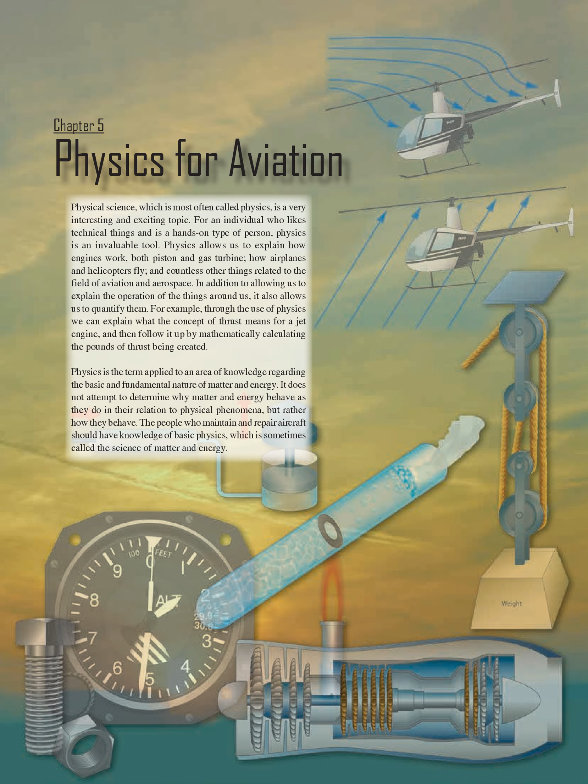The people who maintain and repair aircraft should have knowledge of basic physics, which is sometimes called the science of matter and energy. Matter is the foundation, or the building blocks, for any discussion of physics. According to the dictionary, matter is what all things are made of, whatever occupies space, has mass, and is perceptible to the senses in some way.

According to the law of conservation, matter cannot be created or destroyed, although it is possible to change its physical state. When liquid gasoline vaporizes and mixes with air, and then burns, it might seem that this piece of matter has disappeared and no longer exists. Although it no longer exists in the state of liquid gasoline, the matter still exists in the form of the gases given off by the burning fuel.

Characteristics of matter: mass and weight. Mass is a measure of the quantity of matter in an object. In other words, how many molecules are in the object, how many atoms are in the object, or to be more specific, how many protons, neutrons, and electrons are in the object. The mass of an object does not change regardless of where you take it in the universe, or with a change of state. The only way to change the mass of an object is to add or take away atoms.

Mathematically, mass can be stated as follows: mass equals weight divided by acceleration due to gravity. The acceleration due to gravity here on Earth is 32.2 feet per second per second, 32.2 fps/s. An object weighing 32.2 pounds here on Earth is said to have a mass of 1 slug. A slug is a quantity of mass that will accelerate at a rate of 1 ft/s² when a force of 1 pound is applied. In other words, under standard atmospheric conditions, where gravity is equal to 32.2 fps/s, a mass of 1 slug would be equal to 32.2 pounds.

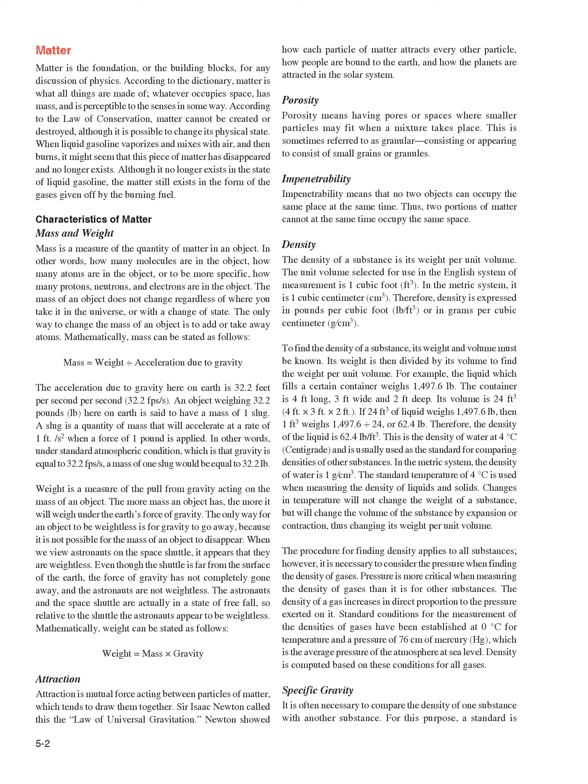Specific gravity. It is often necessary to compare the density of one substance with another substance. For this purpose, a standard is needed. Water is the standard that physicists have chosen to use when comparing the densities of all liquids and solids. For gases, air is most commonly used, but hydrogen is also sometimes used as a standard for gases.

In physics, the word specific implies a ratio. Thus, specific gravity is calculated by comparing the weight of a definite volume of the given substance with the weight of an equal volume of water. The terms specific weight or specific density are sometimes used to express this ratio.

The following formulas are used to find the specific gravity of liquids and solids. Specific gravity equals weight of the substance over weight of an equal volume of water, or specific gravity equals density of the substance over density of water. The same formulas are used to find the density of gases by substituting air or hydrogen for water. Specific gravity is not expressed in units, but as pure numbers.

For example, if a certain hydraulic fluid has a specific gravity of 0.8, 1 ft3 of the liquid weighs 0.8 times as much as 1 ft3 of water, 62.4 times 0.8, or 49.92 pounds. Specific gravity and density are independent of the size of the sample under consideration and depend only upon the substance of which it is made. See Figure 5-1 for typical values of specific gravity for various substances.

A device called a hydrometer is used for measuring specific gravity of liquids. This device consists of a tubular glass float contained in a larger glass tube, Figure 5-2. The larger glass tube provides the container for the liquid. A rubber suction bulb draws the liquid up into the container. There must be enough liquid raising the float to prevent it from touching the bottom. The float is weighted and has a vertically graduated scale.

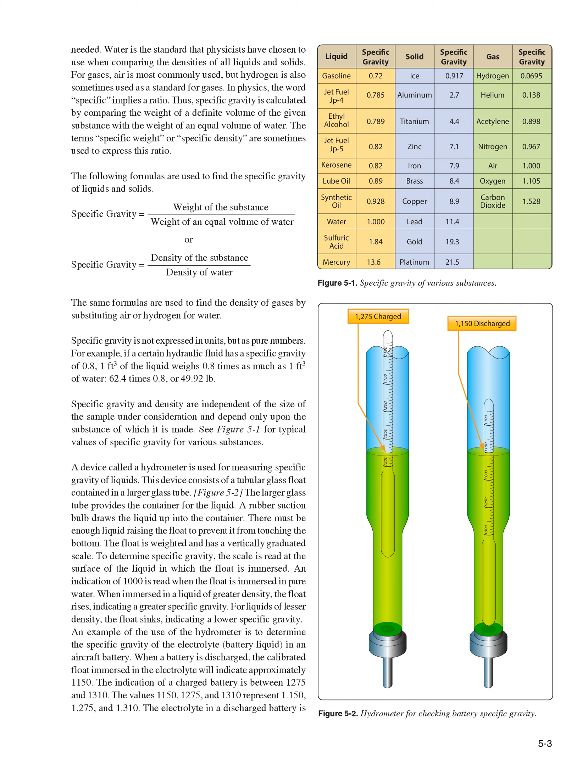The values 1150, 1275, and 1310 represent 1.150, 1.275, and 1.310. The electrolyte in a discharged battery is 1.15 times denser than water, and in a charged battery 1.275 to 1.31 times denser than water.

Energy is typically defined as something that gives us the capacity to perform work. As individuals, saying that we feel full of energy is an indicator that we can perform a lot of work. Energy can be classified as one of two types, either as potential energy or kinetic energy.

Potential energy is defined as being energy at rest, or energy that is stored. Potential energy may be classified into three groups: energy due to position, energy due to distortion of an elastic body, and energy which produces work through chemical action.

Examples of the first group are water in an elevated reservoir or an airplane raised off the ground with jacks. A stretched bungee cord on a Piper Tri-Pacer or a compressed spring are examples of the second group, and energy in aviation gasoline, food, or storage batteries are examples of the third group.

To calculate the potential energy of an object due to its position, as in height, the following formula is used: potential energy equals weight times height. A calculation based on this formula will produce an answer that has units of foot-pounds or inch-pounds, which are the same units that apply to work.

Work, which is covered later in this chapter, is described as a force being applied over a measured distance, with the force being pounds and the distance being feet or inches. Potential energy and work have a lot in common.

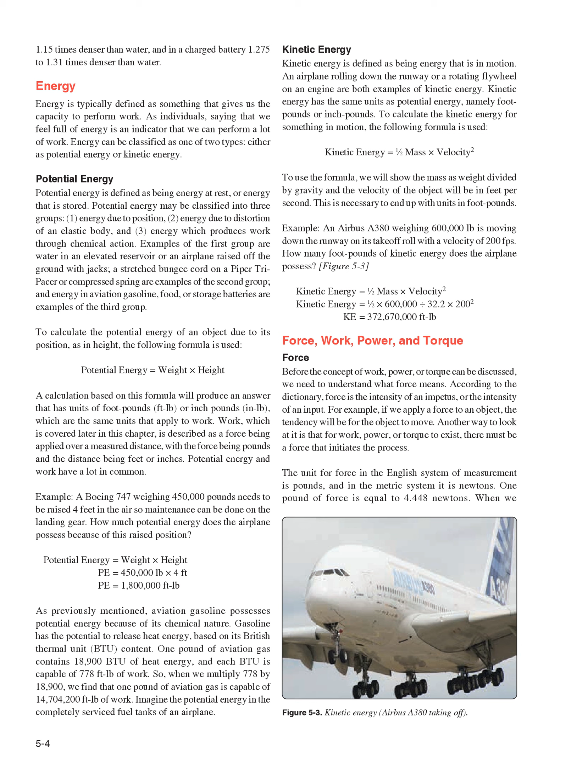When we calculate the thrust of a turbine engine, we use the formula force equals mass times acceleration, and the thrust of the engine is expressed in pounds. The GE90-115 turbofan engine, power plant for the Boeing 777-300, for example, has 115,000 pounds of thrust.

Work: the study of machines, both simple and complex, can be seen as a study of the energy of mechanical work. This is true because all machines transfer input energy, or the work done on the machine, to output energy, or the work done by the machine. Work, in the mechanical sense of the term, is done when a resistance is overcome by force acting through a measurable distance. Two factors are involved: force, and movement through a distance.

As an example, suppose a small aircraft is stuck in the snow. Two men push against it for a period of time, but the aircraft does not move. According to the technical definition, no work had been done when the men were pushing against the aircraft.

By definition, work is accomplished only when an object is displaced some distance against a resistive force. To calculate work, the following formula is used: work equals force, F, times distance, D.

In the English system, the force will be identified in pounds and the distance either in feet or inches, so the units will be foot-pounds or inch-pounds. Notice these are the same units that were used for potential and kinetic energy.

In the metric system, the force is identified in newtons, N, and the distance in meters, with the resultant units being joules. 1 pound of force is equal to 4.448 N and 1 meter is equal to 3.28 feet. 1 joule is equal to 1.36 foot-pounds.

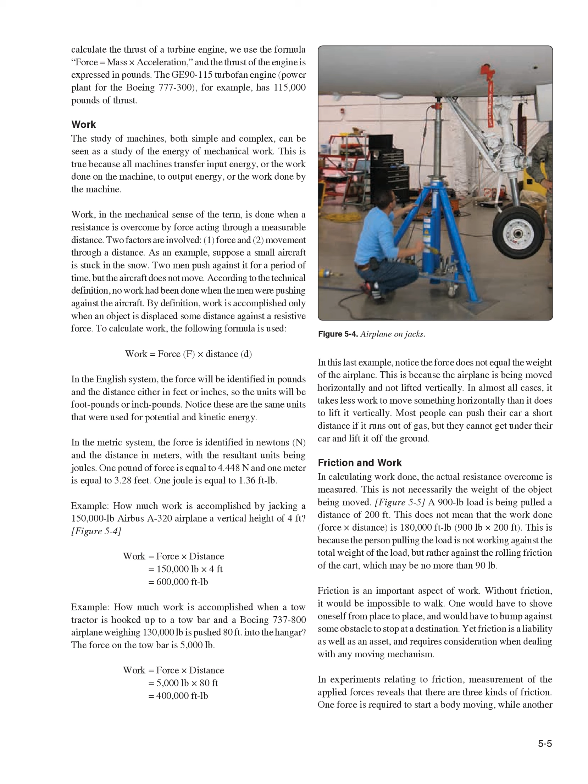In experiments relating to friction, measurement of the applied forces reveals that there are three kinds of friction. One force is required to start a body moving, while another is required to keep the body moving at constant speed. Also, after a body is in motion, a definitely larger force is required to keep it sliding than to keep it rolling. Thus, the three kinds of friction may be classified as: 1. Starting or static friction, 2. Sliding friction, and 3. Rolling friction.

Static friction. When an attempt is made to slide a heavy object along a surface, the object must first be broken loose or started. Once in motion, it slides more easily. The breaking loose force is, of course, proportional to the weight of the body. The force necessary to start the body moving slowly is designated F, and F is the normal force pressing the body against the surface, which is usually its weight.

Since the nature of the surfaces rubbing against each other is important, they must be considered. The nature of the surfaces is indicated by the coefficient of starting friction, which is designated by the letter K. This coefficient can be established for various materials and is often published in tabular form. Thus, when the load, weight of the object, is known, starting friction can be calculated by using the following formula.

F equals Kf. For example, if the coefficient of sliding friction of a smooth iron block on a smooth, horizontal surface is 0.3, the force required to start a 10 pound block would be 3 pounds, a 40-pound block, 12 pounds. Starting friction for objects equipped with wheels and roller bearings is much smaller than that for sliding objects.

For example, a locomotive would have difficulty getting a long train of cars in motion all at one time. Therefore, the couplers between the cars are purposely made to have a few inches of play. When starting the train, the engineer backs the engine until all the cars are pushed together. Then, with a quick start forward, the first car is set in motion.

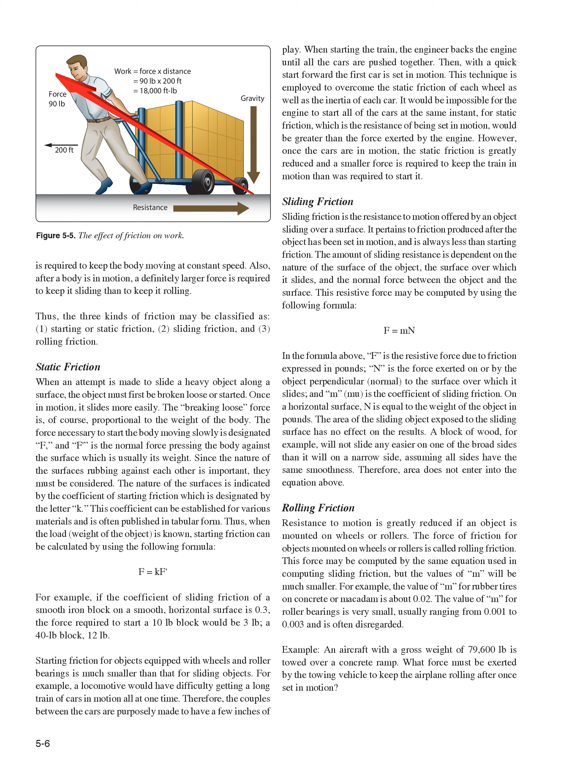Example: an aircraft with a gross weight of 79,600 pounds is towed over a concrete ramp. What force must be exerted by the towing vehicle to keep the airplane rolling after once set in motion? F equals mu N equals 0.02 times 79,600 pounds equals 1,592 pounds.

The concept of power involves the previously discussed topic of work, which was a force being applied over a measured distance, but adds one more consideration: time. In other words, how long it takes to accomplish the work. If someone asked the average person if he or she could lift 1 million pounds 5 feet off the ground, the answer most assuredly would be no.

This person would probably assume that he or she is to lift it all at once. What if he or she is given 365 days to lift it, and could lift small amounts of weight at a time? The work involved would be the same, regardless of how long it took to lift the weight, but the power required is different. If the weight is to be lifted in a shorter period of time, it will take more power.

The formula for power is as follows: power equals force times distance divided by time. The units for power will be foot-pounds per minute, foot-pounds per second, inch-pounds per minute or second, and possibly mile-pounds per hour. The units depend on how distance and time are measured.

Many years ago, there was a desire to compare the power of the newly evolving steam engine to that of horses. People wanted to know how many horses the steam engine was equivalent to. The value we know currently as 1 horsepower, HP, was developed, and it is equal to 550 foot-pounds per second. Because of this, it was found that the average horse could lift a weight of 550 pounds, 1 foot off the ground, in 1 second.

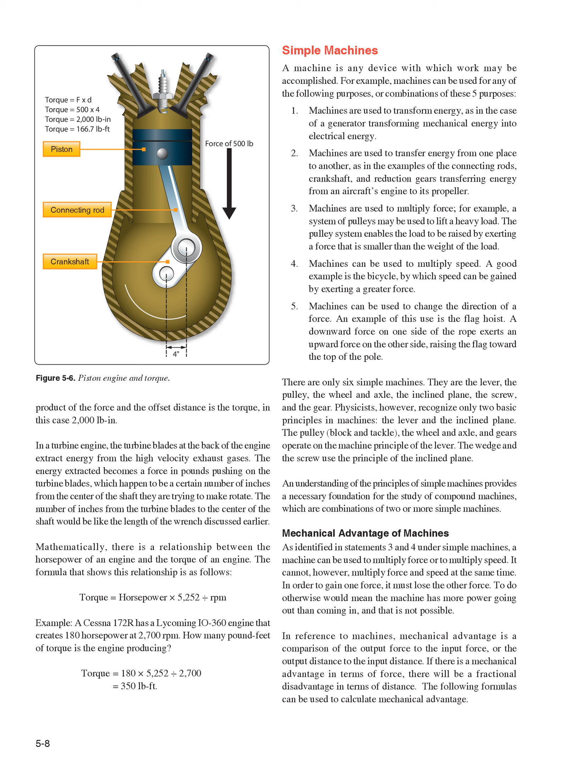In reference to machines, mechanical advantage is a comparison of the output force to the input force, or the output distance to the input distance. If there is a mechanical advantage in terms of force, there will be a fractional disadvantage in terms of distance. The following formulas can be used to calculate mechanical advantage. Mechanical advantage equals force out divided by force in, or mechanical advantage equals distance out divided by distance in.

The lever. The simplest machine, and perhaps the most familiar one, is the lever. A seesaw is a familiar example of a lever, with 2 people sitting on either end of a board and a pivoting point in the middle. There are 3 basic parts in all levers. They are the fulcrum F, a force or effort E, and a resistance R.

Shown in figure 5-7 are the pivot point F, fulcrum, the effort E which is applied at a distance L from the fulcrum, and a resistance R which acts at a distance L from the fulcrum. Distances L and L are the lever arms.

The concept of torque was discussed earlier in this chapter, and torque is very much involved in the operation of a lever. When a person sits on one end of a seesaw, that person applies a downward force in pounds which acts along the distance to the center of the seesaw. This combination of force and distance creates torque, which tries to cause rotation.

First-class lever. In the first-class lever, the fulcrum is located between the effort and the resistance. As mentioned earlier, the seesaw is a good example of a lever, and it happens to be a first-class lever. The amount of weight and the distance from the fulcrum can be varied to suit the need. Increasing the distance from the applied effort to the fulcrum, compared to the distance from the fulcrum to the weight being moved, increases the advantage provided by the lever.

Crowbars, shears, and pliers are common examples of this class of lever. The proper balance of an airplane is also a good example, with the center of lift on the wing being the pivot point, or fulcrum, and the weight fore and aft of this point being the effort and the resistance.

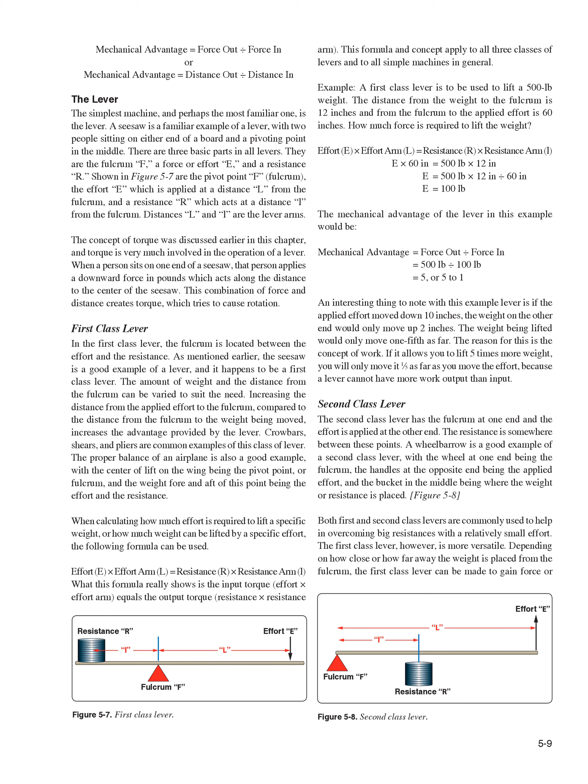Both first and second-class levers are commonly used to help in overcoming big resistances with a relatively small effort. The first-class lever, however, is more versatile. Depending on how close or how far away the weight is placed from the fulcrum, the first-class lever can be made to gain force or gain distance, but not both at the same time. The second-class lever can only be made to gain force.

Example: the distance from the center of the wheel to the handles on a wheelbarrow is 60 inches. The weight in the bucket is 18 inches from the center of the wheel. If 300 pounds is placed in the bucket, how much force must be applied at the handles to lift the wheelbarrow? Effort (E) times effort arm (L) equals resistance (R) times resistance arm (L). E × 60 inches = 300 pounds × 18, so E = 300 pounds × 18 ÷ 60, and E = 90 pounds.

The mechanical advantage of the lever in this example would be: mechanical advantage equals force out divided by force in, equals 300 pounds divided by 90 pounds, equals 3.33, or 3.33 to 1.

Third-class lever. There are occasions when it is desirable to speed up the movement of the resistance even though a large amount of effort must be used. Levers that help accomplish this are third-class levers. As shown in Figure 5.9, the fulcrum is at one end of the lever and the weight or resistance to be overcome is at the other end, with the effort applied at some point between. Third-class levers are easily recognized because the effort is applied between the fulcrum and the resistance.

The retractable main landing gear on an airplane is a good example of a third-class lever. The top of the landing gear, where it attaches to the airplane, is the pivot point. The wheel and brake assembly at the bottom of the landing gear is the resistance. The hydraulic actuator that makes the gear retract is attached somewhere in the middle, and that is the applied effort.

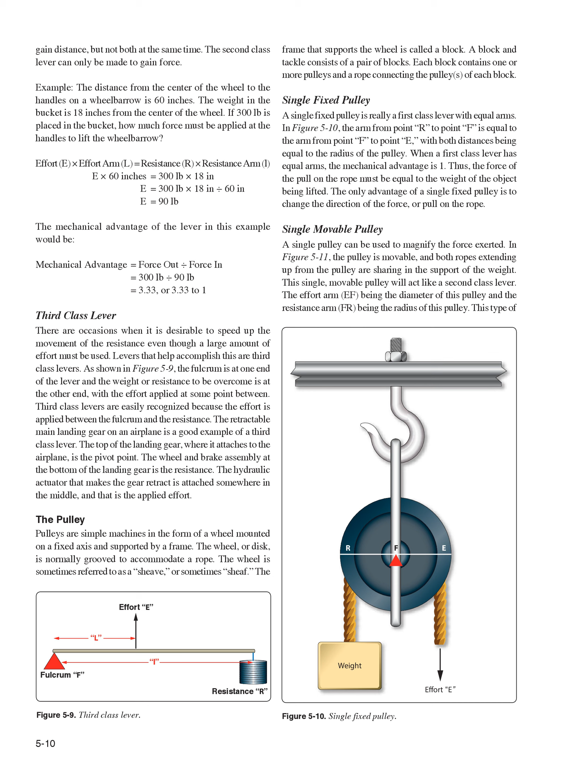This type of pulley would have a mechanical advantage of 2 because the diameter of the pulley is double the radius of the pulley. In use, if someone pulled in 4 feet of the effort rope, the weight would only rise off the floor 2 feet. If the weight was 100 pounds, the effort applied would only need to be 50 pounds.

With this type of pulley, the effort will always be 1/2 of the weight being lifted.

Block and tackle. A block and tackle is made up of multiple pulleys, some of them fixed and some movable. In Figure 5.12, the block and tackle is made up of 4 pulleys, the top 2 being fixed and the bottom 2 being movable. Viewing the figure from right to left, notice there are 4 ropes supporting the weight and a 5th rope where the effort is applied. The number of weight supporting ropes determines the mechanical advantage of a block and tackle, so in this case the mechanical advantage is 4. If the weight was 200 pounds, it would require a 50 pound effort to lift it.

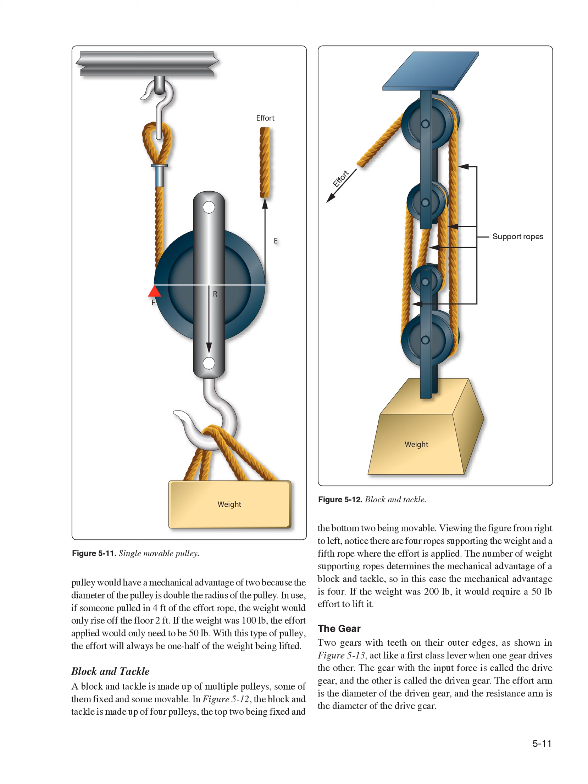This analysis tells us that when a large gear drives a small one, the small one turns faster and has less available force. In order to be a force-gaining machine, the small gear needs to turn the large one. When the terminology reduction gearbox is used, such as a propeller reduction gearbox, it means that there is more RPM going in than is coming out. The end result is an increase in force and ultimately torque.

Bevel gears are used to change the plane of rotation, so that a shaft turning horizontally can make a vertical shaft rotate. The size of the gears and their number of teeth determine the mechanical advantage, and whether force is being increased or RPM is being increased. If each gear has the same number of teeth, there would be no change in force or RPM.

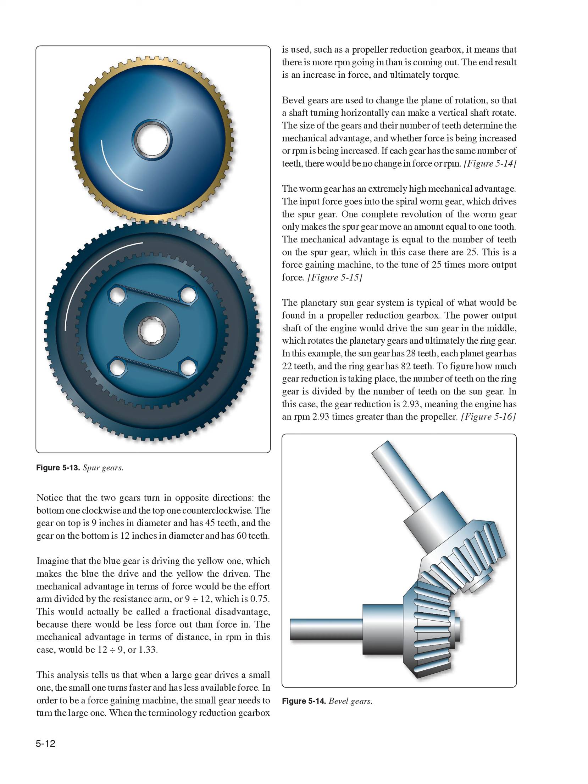Figure 5.16. Inclined plane. The inclined plane is a simple machine that facilitates the raising or lowering of heavy objects by application of a small force over a relatively long distance. Some familiar examples of the inclined plane are mountain highways, and a loading ramp on the back of a moving truck. When weighing a small airplane, like a Cessna 172, an inclined plane, or ramp, can be used to get the airplane on the scales by pushing it, rather than jacking it.

To calculate the force needed to push the airplane up the ramps, use the same formula introduced earlier when levers were discussed, as follows: Effort (E) times effort arm (L) equals resistance (R) times resistance arm (l). E × 24 in = 1,600 lb × 6 in. E = 1,600 lb × 6 in ÷ 24 in. E = 400 pounds.

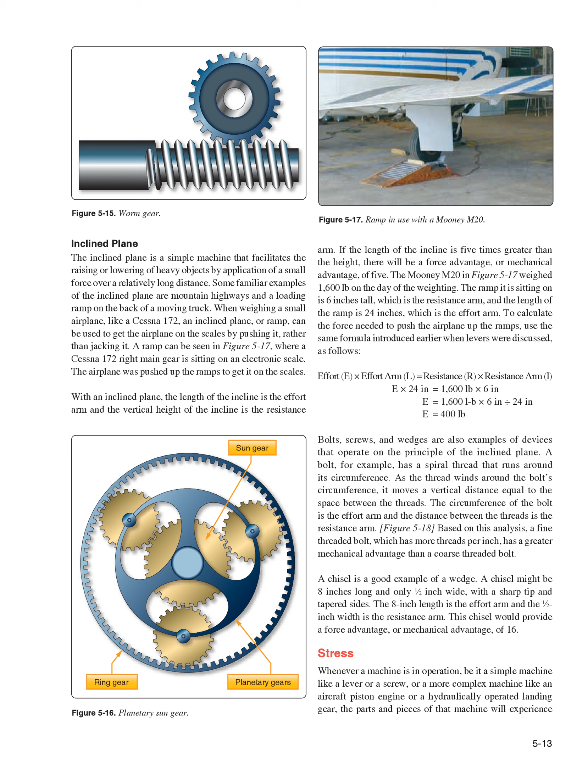Stress. Whenever a machine is in operation, be it a simple machine like a lever or a screw, or a more complex machine like an aircraft piston engine or a hydraulically operated landing gear, the parts and pieces of that machine will experience something called stress. Whenever an external force is applied to an object, like a weight pushing on the end of a lever, a reaction will occur inside the object which is known as stress. Stress is typically measured in pounds per square foot or pounds per square inch (psi).

External force acting on an object causes the stress to manifest itself in one of 5 forms, or a combination of those 5. The 5 forms are tension, compression, torsion, bending, and shear. Tension is a force that tries to pull an object apart.

In the block and tackle system discussed earlier in this chapter, the upper block that housed the 2 fixed pulleys was secured to an overhead beam. The movable lower block and its 2 pulleys were hanging by ropes, and the weight was hanging below the entire assembly. The weight being lifted would cause the ropes and the blocks to be under tension. The weight is literally trying to pull the rope apart, and ultimately would cause the rope to break if the weight was too great. Compression is a force that tries to crush an object.

An excellent example of compression is when a sheet metal airplane is assembled using the fastener known as a rivet. The rivet passes through a hole drilled in the pieces of aluminum, and then a rivet gun on one side and a bucking bar on the other apply a force. This applied force tries to crush the rivet and makes it expand to fill the hole and securely hold the aluminum pieces together.

Figure 5.19. Torsion is the stress an object experiences when it is twisted, which is what happens when torque is applied to a shaft. Torsion is made up of 2 other stresses, tension and compression. When a shaft is twisted, tension is experienced at a diagonal to the shaft and compression acts 90 degrees to the tension.

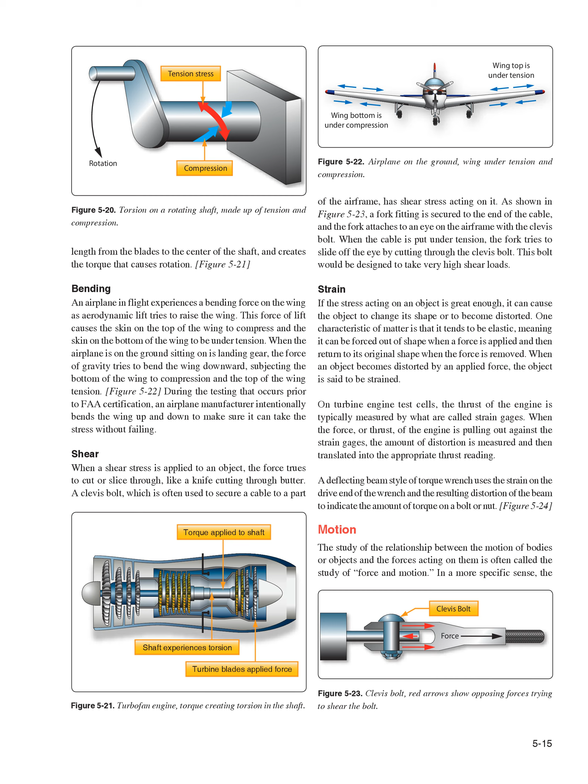Figure 5.24. Motion. The study of the relationship between the motion of bodies or objects and the forces acting on them is often called the study of force and motion. In a more specific sense, the relationship between velocity, acceleration, and distance is known as kinematics.

Uniform motion. Motion may be defined as a continuing change of position or place, or as the process in which a body undergoes displacement. When an object is at different points in space at different times, that object is said to be in motion, and if the distance the object moves remains the same for a given period of time, the motion may be described as uniform. Thus, an object in uniform motion always has a constant speed.

Speed and velocity. In everyday conversation, speed and velocity are often used as if they mean the same thing. In physics, they have definite and distinct meanings. Speed refers to how fast an object is moving, or how far the object will travel in a specific time. The speed of an object tells nothing about the direction an object is moving.

For example, if the information is supplied that an airplane leaves New York City and travels 8 hours at a speed of 150 miles per hour, this information tells nothing about the direction in which the airplane is moving. At the end of 8 hours, it might be in Kansas City, or if it traveled in a circular route, it could be back in New York City.

Velocity is that quantity in physics which denotes both the speed of an object and the direction in which the object moves. Velocity can be defined as the rate of motion in a particular direction. Velocity is also described as being a vector quantity, a vector being a line of specific length, having an arrow on one end or the other. The length of the line indicates the number value and the arrow indicates the direction in which that number is acting.

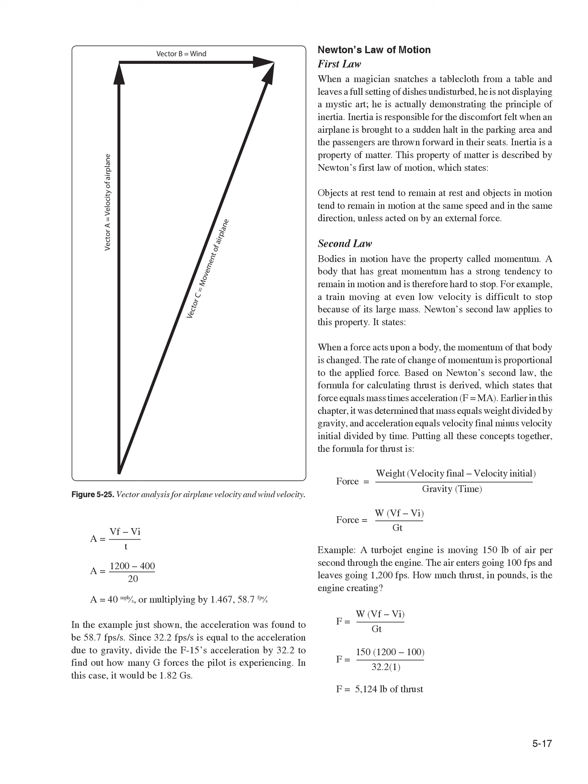Third law: Newton's third law of motion is often called the law of action and reaction. It states that for every action there is an equal and opposite reaction. This means that if a force is applied to an object, the object will supply a resistive force exactly equal to and in the opposite direction of the force applied.

It is easy to see how this might apply to objects at rest. In application, as a man stands on the floor, the floor exerts a force against his feet exactly equal to his weight. This law is also applicable when a force is applied to an object in motion. Forces always occur in pairs. The term acting force means the force one body exerts on a second body, and reacting force means the force the second body exerts on the first.

When an aircraft propeller pushes a stream of air backward with a force of 500 pounds, the air pushes the blades forward with a force of 500 pounds. This forward force causes the aircraft to move forward.

A turbofan engine exerts a force on the air entering the inlet duct, causing it to accelerate out the fan duct and the tailpipe. The air accelerating to the rear is the action, and the force inside the engine that makes it happen is the reaction, also called thrust.

Circular motion is the motion of an object along a curved path that has a constant radius. For example, if one end of a string is tied to an object and the other end is held in the hand, the object can be swung in a circle. The object is constantly deflected from a straight, linear path by the pull exerted on the string, as shown in figure 5-26.

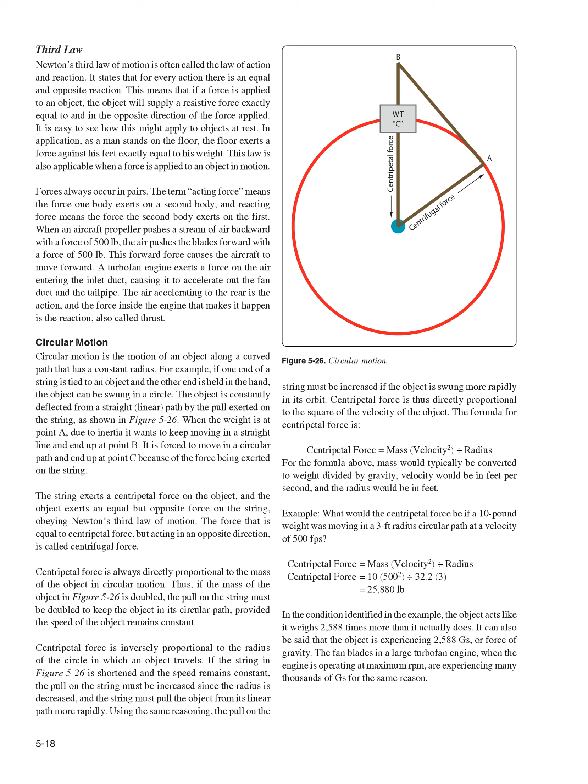In the condition identified in the example, the object acts like it weighs 2,588 times more than it actually does. It can also be said that the object is experiencing 2,588 Gs, or force of gravity. The fan blades in a large turbofan engine, when the engine is operating at maximum RPM, are experiencing many thousands of Gs for the same reason.

Heat is a form of energy. It is produced only by the conversion of one of the other forms of energy. Heat may also be defined as the total kinetic energy of the molecules of any substance. Some forms of energy which can be converted into heat energy are as follows.

Mechanical energy: this includes all methods of producing increased motion of molecules such as friction, impact of bodies, or compression of gases. Electrical energy is converted to heat energy when an electric current flows through any form of resistance such as an electric iron, electric light, or an electric blanket.

Chemical energy: most forms of chemical reaction convert stored potential energy into heat. Some examples are the explosive effects of gunpowder, the burning of oil or wood, and the combining of oxygen and grease. Radiant energy: electromagnetic waves of certain frequencies produce heat when they are absorbed by the bodies they strike,

such as X-rays, light rays, and infrared rays. Nuclear energy: energy stored in the nucleus of atoms is released during the process of nuclear fission in a nuclear reactor or atomic explosion. Sun: all heat energy can be directly or indirectly traced to the nuclear reactions occurring in the sun.

When a gas is compressed, work is done and the gas becomes warm or hot. Conversely, when a gas under high pressure is allowed to expand, the expanding gas becomes cool. In the first case, work was converted into energy in the form of heat. In the second case, heat energy was expended. Since heat is given off or absorbed, there must be a relationship between heat energy and work. Also, when two surfaces are rubbed together, the friction develops heat.

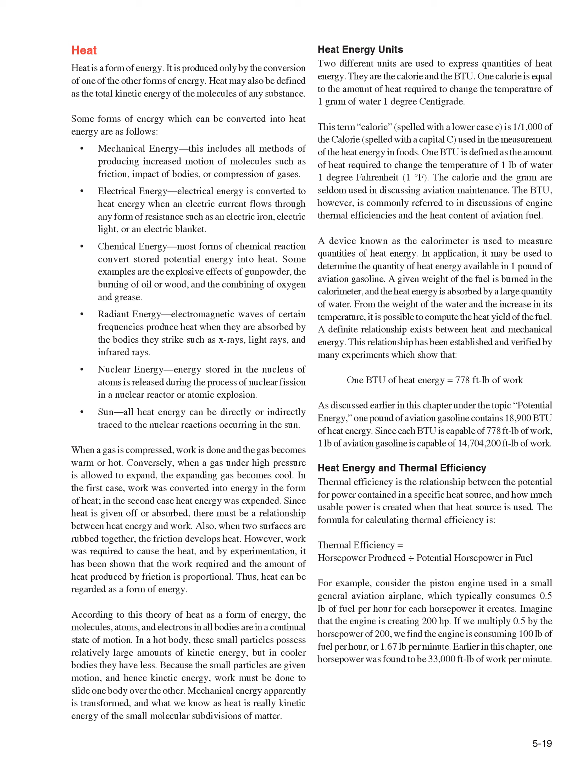Earlier in this chapter, 1 horsepower was found to be 33,000 feet-pounds of work per minute. The potential horsepower in the fuel burned for this example engine would be: 1.67 pounds per minute times 18,900 BTUs per pound, times 778 feet-pounds per BTU, divided by 33,000 feet-pounds per minute. HP equals 744. The example engine is burning enough fuel that it has the potential to create 744 horsepower, but it is only creating 200.

The thermal efficiency of the engine would be: thermal efficiency equals HP produced divided by HP in fuel, equals 200 divided by 744, equals 0.2688, or 26.88%. More than 70% of the energy in the fuel is not being used to create usable horsepower. The wasted energy is in the form of friction and heat. A tremendous amount of heat is given up to the atmosphere and not used inside the engine to create power.

Heat transfer. There are three methods by which heat is transferred from one location to another, or from one substance to another: conduction, convection, and radiation. Conduction heat transfer always takes place by areas of high heat energy migrating to areas of low heat energy. Heat transfer by conduction requires that there be physical contact between an object that has a large amount of heat energy and one that has a smaller amount.

Everyone knows from experience that the metal handle of a heated pan can burn the hand. A plastic or wood handle, however, remains relatively cool even though it is in direct contact with the pan.

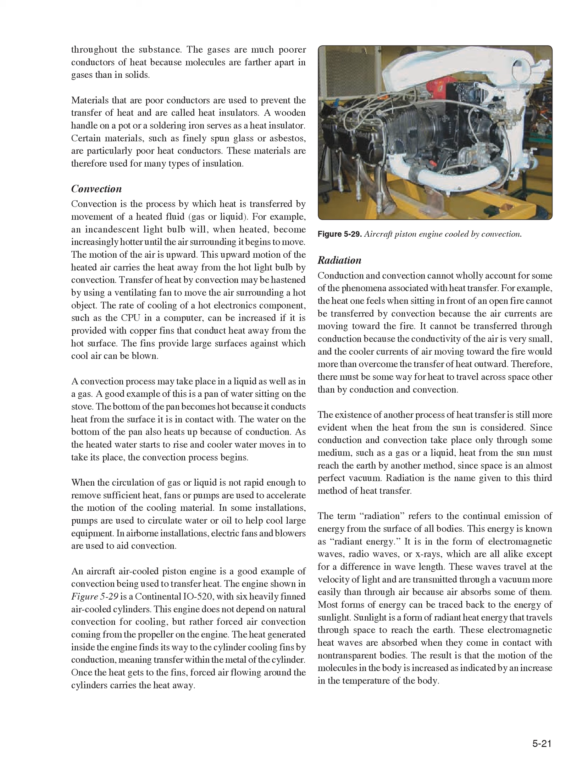These electromagnetic heat waves are absorbed when they come in contact with non-transparent bodies. The result is that the motion of the molecules in the body is increased as indicated by an increase in the temperature of the body. The differences between conduction, convection, and radiation may now be considered. First, although conduction and convection are extremely slow, radiation takes place at the speed of light. This fact is evident at the time of an eclipse of the sun when the shutting off of the heat from the sun takes place at the same time as the shutting off of the light.

Second, radiant heat may pass through a medium without heating it. In application, the air inside a greenhouse may be much warmer than the glass through which the sun's rays pass. Third, although heat transfer by conduction or convection may travel in roundabout routes, radiant heat always travels in a straight line. For example, radiation can be cut off with a screen placed between the source of heat and the body to be protected. Specific heat.

One important way in which substances differ is in the requirement of different quantities of heat to produce the same temperature change in a given mass of the substance. Each substance requires a quantity of heat, called its specific heat capacity, to increase the temperature of a unit of its mass 1 degree Celsius. The specific heat of a substance is the ratio of its specific heat capacity to the specific heat capacity of water. Specific heat is expressed as a number which, because it is a ratio, has no units and applies to both the English and the metric systems.

It is fortunate that water has a high specific heat capacity. The larger bodies of water on the Earth keep the air and solid matter on or near the surface of the Earth at a constant temperature. A great quantity of heat is required to change the temperature of a large lake or river. Therefore, when the temperature falls below that of such bodies of water, they give off large quantities of heat. This process keeps the atmospheric temperature at the surface of the Earth from changing rapidly. The specific heat values of some common materials are listed in Figure 5-30.

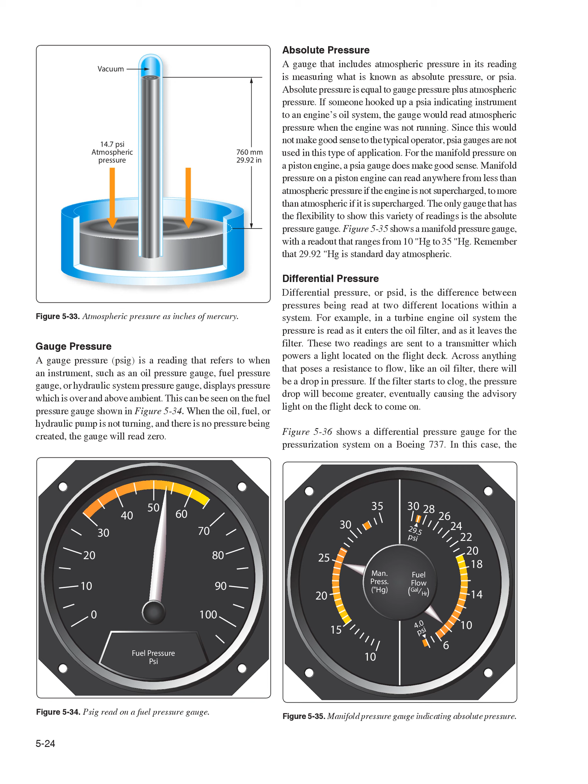Figure 5-36 shows a differential pressure gauge for the pressurization system on a Boeing 737. In this case, the difference in pressure is between the inside and the outside of the airplane. If the pressure difference becomes too great, the structure of the airplane could become overstressed.

Gas laws. The simple structure of gases makes them readily adaptable to mathematical analysis, from which has evolved the detailed theory of the behavior of gases. This is called the kinetic theory of gases. The theory assumes that a body of gas is composed of identical molecules which behave like minute elastic spheres, spaced relatively far apart and continuously in motion. The degree of molecular motion is dependent upon the temperature of the gas.

Since the molecules are continuously striking against each other and against the walls of the container, an increase in temperature with the resulting increase in molecular motion causes a corresponding increase in the number of collisions between the molecules. The increased number of collisions results in an increase in pressure because a greater number of molecules strike against the walls of the container in a given unit of time. If the container were an open vessel, the gas would expand and overflow from the container. However, if the container is sealed and possesses elasticity, such as a rubber balloon, the increased pressure causes the container to expand.

For instance, when making a long drive on a hot day, the pressure in the tires of an automobile increases, and a tire which appeared to be somewhat soft in cool morning temperature may appear normal at a higher midday temperature. Such phenomena as these have been explained and set forth in the form of laws pertaining to gases and tend to support the kinetic theory.

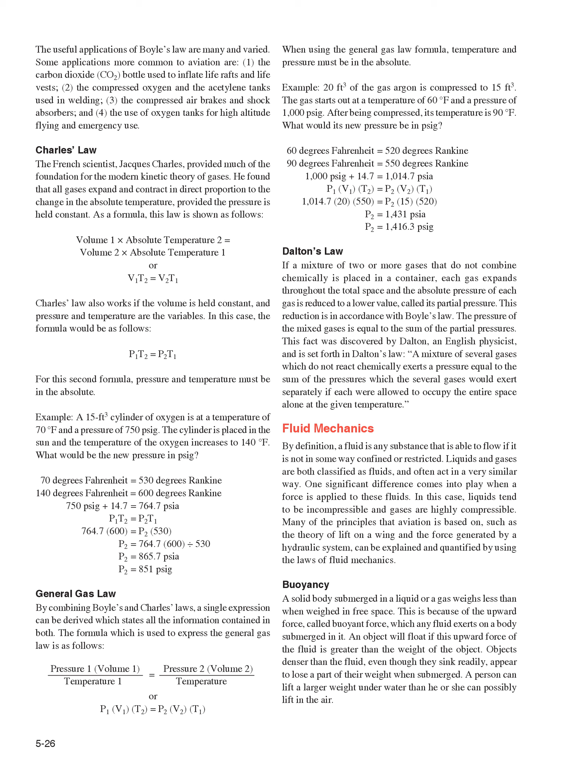Buoyancy: a solid body submerged in a liquid or a gas weighs less than when weighed in free space. This is because of the upward force, called buoyant force, which any fluid exerts on a body submerged in it. An object will float if this upward force of the fluid is greater than the weight of the object. Objects denser than the fluid, even though they sink readily, appear to lose a part of their weight when submerged. A person can lift a larger weight underwater than he or she can possibly lift in the air.

As the cube is lowered into the overflow can, the water is caught in the catch bucket. The volume of water which overflows equals the volume of the cube. The volume of irregular shaped objects can also be measured by using this method.

If this experiment is performed carefully, the weight of the water displaced by the metal cube exactly equals the buoyant force of the water, which the scale shows to be 7 pounds. Archimedes, 287 to 212 BC, performed similar experiments. As a result, he discovered that the buoyant force which a fluid exerts upon a submerged body is equal to the weight of the fluid the body displaces. This statement is referred to as Archimedes' principle.

This principle applies to all fluids, gases as well as liquids. Just as water exerts a buoyant force on submerged objects, air exerts a buoyant force on objects submerged in it. The amount of buoyant force available to an object can be calculated by using the following formula. Buoyant force equals volume of object times density of fluid displaced.

If the buoyant force is more than the object weighs, the object will float. If the buoyant force is less than the object weighs, the object will sink. For the object that sinks, its measurable weight will be less by the weight of the displaced fluid.

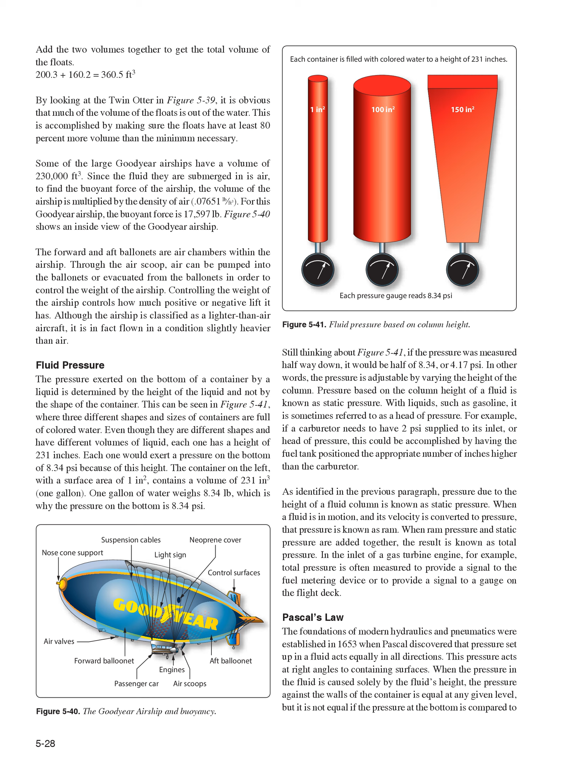Pascal's law: the foundations of modern hydraulics and pneumatics were established in 1653 when Pascal discovered that pressure set up in a fluid acts equally in all directions. This pressure acts at right angles to containing surfaces. When the pressure in the fluid is caused solely by the fluid's height, the pressure against the walls of the container is equal at any given level, but it is not equal if the pressure at the bottom is compared to the pressure halfway down. The concept of the pressure set up in a fluid, and how it relates to the force acting on the fluid and the surface area through which it acts, is Pascal's law.

In Figure 541, if a piston is placed at the top of the cylinder and an external force pushes down on the piston, additional pressure will be created in the liquid. If the additional pressure is 100 pounds per square inch, this 100 pounds per square inch will act equally and undiminished from the top of the cylinder all the way to the bottom. The gauge at the bottom will now read 108.34 pounds per square inch, and if a gauge were positioned halfway down the cylinder, it would read 104.17 pounds per square inch, which is found by adding 100 plus half of 8.34.

Pascal's law, when dealing with the variables of force, pressure, and area, is dealt with by way of the following formula: force equals pressure times area. In this formula, the force is in units of pounds, the pressure is in pounds per square inch, psi, and the area is in square inches. By transposing the original formula, we have two additional formulas, as follows: pressure equals force divided by area and area equals force divided by pressure.

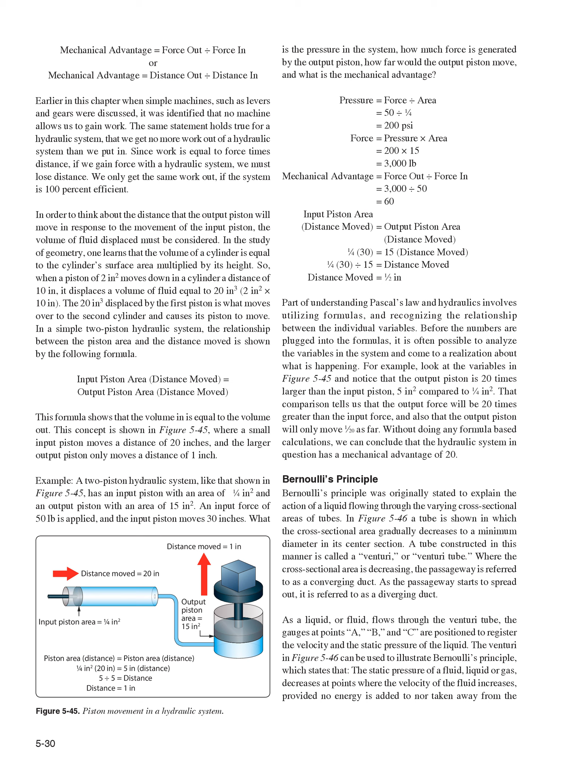As the tube narrows in the center, it must contain the same volume of fluid as the two end areas. As indicated by the velocity gauge reading high and the pressure gauge reading low, in this narrow section, the liquid moves at a higher velocity, producing a lower pressure than that at points A and C.

A good application for the use of the venturi principle is in a float-type carburetor. As the air flows through the carburetor on its way to the engine, it goes through a venturi, where the static pressure is reduced. The fuel in the carburetor, which is under a higher pressure, flows into the lower pressure venturi area and mixes with the air.

Bernoulli's principle is extremely important in understanding how some of the systems used in aviation work, including how the wing of an airplane generates lift, or why the inlet duct of a turbine engine on a subsonic airplane is diverging in shape. The wing on a slow-moving airplane has a curved top surface and a relatively flat bottom surface.

The curved top surface acts like half of the converging-shaped middle of a venturi. As the air flows over the top of the wing, the air speeds up, and its static pressure decreases. The static pressure on the bottom of the wing is now greater than the pressure on the top, and this pressure difference creates the lift on the wing.

Bernoulli's principle and the concept of lift on a wing are covered in greater depth in aircraft theory of flight, located in this chapter. Sound has been defined as a series of disturbances in matter that the human ear can detect. This definition can also be applied to disturbances which are beyond the range of human hearing.

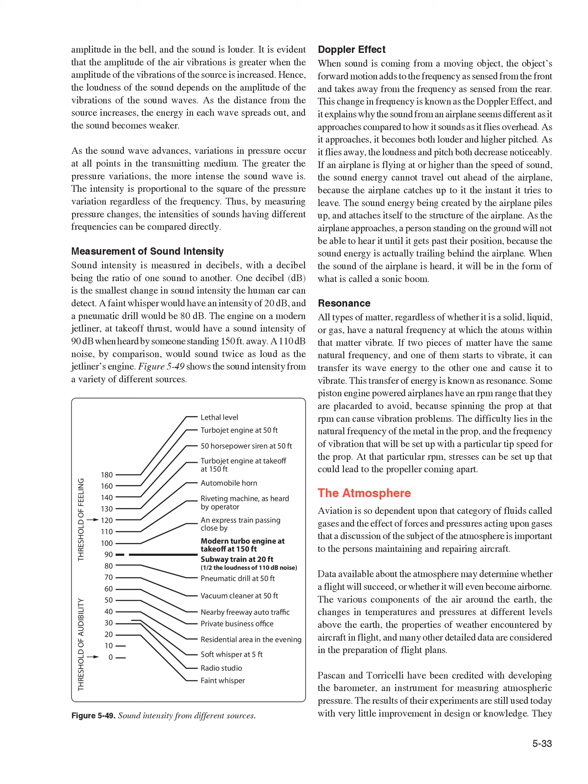The results of their experiments are still used today with very little improvement in design or knowledge. They determined that air has weight which changes as altitude is changed with respect to sea level. Today scientists are also interested in how the atmosphere affects the performance of the aircraft and its equipment.

Composition of the atmosphere: the atmosphere is a complex and ever-changing mixture. Its ingredients vary from place to place and from day to day. In addition to a number of gases, it contains quantities of foreign matter such as pollen, dust, bacteria, soot, volcanic ash, spores, and dust from outer space.

The composition of the air remains almost constant from sea level up to its highest level, but its density diminishes rapidly with altitude. 6 miles up, for example, it is too thin to support respiration, and 12 miles up, there is not enough oxygen to support combustion, except in some specially designed turbine engine-powered airplanes.

At a point several hundred miles above the Earth, some gas particles spray out into space, some are dragged by gravity and fall back into the ocean of air below, while others never return. Physicists disagree as to the boundaries of the outer fringes of the atmosphere.

Some think it begins 240 miles above the Earth and extends to 400 miles. Others place its lower edge at 600 miles and its upper boundary at 6,000 miles. There are also certain nonconformities at various levels.

Between 12 and 30 miles, high solar ultraviolet radiation reacts with oxygen molecules to produce a thin curtain of ozone, a very poisonous gas without which life on Earth could not exist. This ozone filters out a portion of the sun's lethal ultraviolet rays, allowing only enough coming through to give us sunburn, kill bacteria, and prevent rickets.

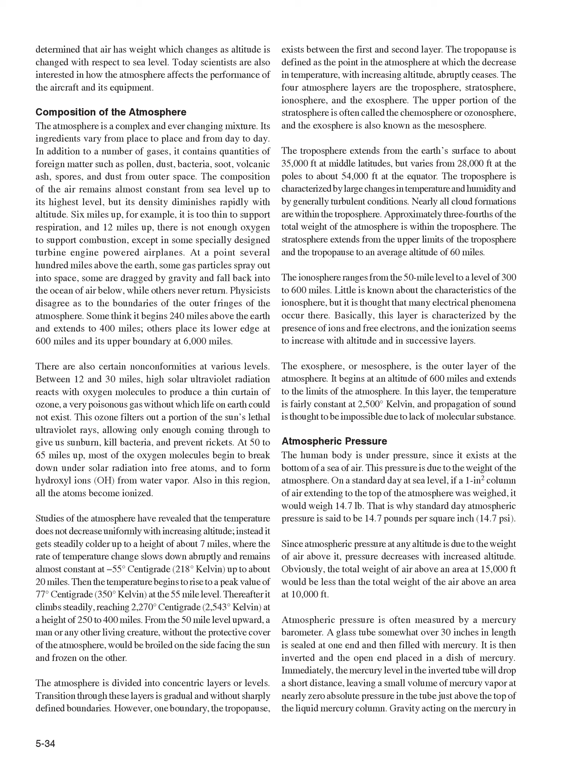Gravity acting on the mercury in the tube will try to make the mercury run out. Atmospheric pressure pushing down on the mercury in the open container tries to make the mercury stay in the tube. At some point these two forces, gravity and atmospheric pressure, will equilibrate and the mercury will stabilize at a certain height in the tube.

Under standard day atmospheric conditions, the air in a 1 square inch column extending to the top of the atmosphere would weigh 14.7 pounds. A 1 square inch column of mercury, 29.92 inches tall, would also weigh 14.7 pounds. That is why 14.7 pounds per square inch is equal to 29.92 inches Hg. Figure 5-50 demonstrates this point.

A second means of measuring atmospheric pressure is with an aneroid barometer. This mechanical instrument is a much better choice than a mercury barometer for use on airplanes. Aneroid barometers, or altimeters, are used to indicate altitude in flight. The calibrations are made in thousands of feet rather than in psi or inches of mercury. For example, the standard pressure at sea level is 29.92 inches Hg, or 14.7 pounds per square inch.

At 10,000 feet above sea level, standard pressure is 20.58 inches Hg, or 10.10 pounds per square inch. Altimeters are calibrated so that if the pressure exerted by the atmosphere is 10.10 psi, the altimeter will point to 10,000 feet. Figure 5-51, atmospheric density.

Since both temperature and pressure decrease with altitude, it might appear that the density of the atmosphere would remain fairly constant with increased altitude. This is not true, however, because pressure drops more rapidly with increased altitude than does the temperature. The result is that density decreases with increased altitude.

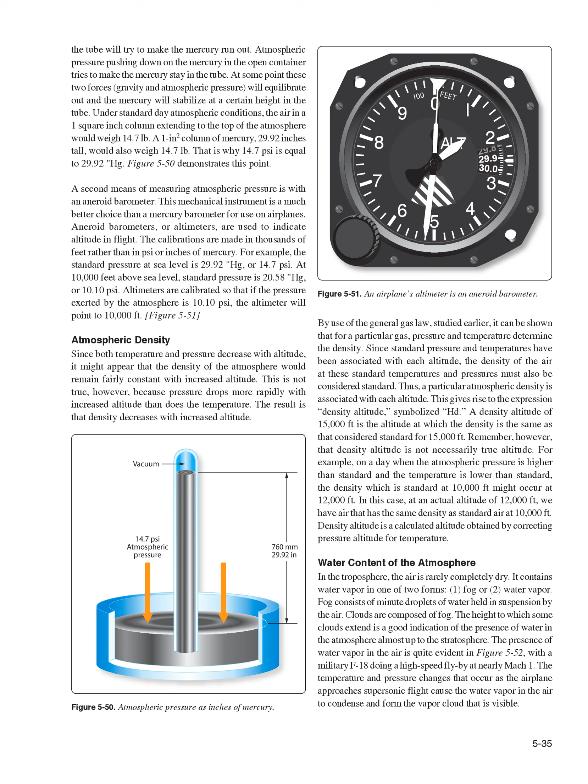As a result of evaporation, the atmosphere always contains some moisture in the form of water vapor. The moisture in the air is called the humidity of the air. Moisture does not consist of tiny particles of liquid held in suspension in the air as in the case of fog, but is an invisible vapor truly as gaseous as the air with which it mixes. Fog and humidity both affect the performance of an aircraft.

In flight, at cruising power, the effects are small and receive no consideration. During takeoff, however, humidity has important effects. Two things are done to compensate for the effects of humidity on takeoff performance. Since humid air is less dense than dry air, the allowable takeoff gross weight of an aircraft is generally reduced for operation in areas that are consistently humid. Second, because the power output of reciprocating engines is decreased by humidity, the manifold pressure may need to be increased above that recommended for takeoff in dry air in order to obtain the same power output.

Engine power output is calculated on dry air. Since water vapor is incombustible, its pressure in the atmosphere is a total loss as far as contributing to power output. The mixture of water vapor and air is drawn through the carburetor, and fuel is metered into it as though it were all air. This mixture of water vapor, air, and fuel enters the combustion chamber where it is ignited. Since the water vapor will not burn, the effective fuel/air ratio is enriched and the engine operates as though it were on an excessively rich mixture.

The resulting horsepower loss under humid conditions can therefore be attributed to the loss in volumetric efficiency due to displaced air, and the incomplete combustion due to an excessively rich fuel and air mixture. The reduction in power that can be expected from humidity is usually given in charts in the flight manual. There are several types of charts in use. Some merely show the expected reduction in power due to humidity, others show the boost in manifold pressure necessary to restore full takeoff power.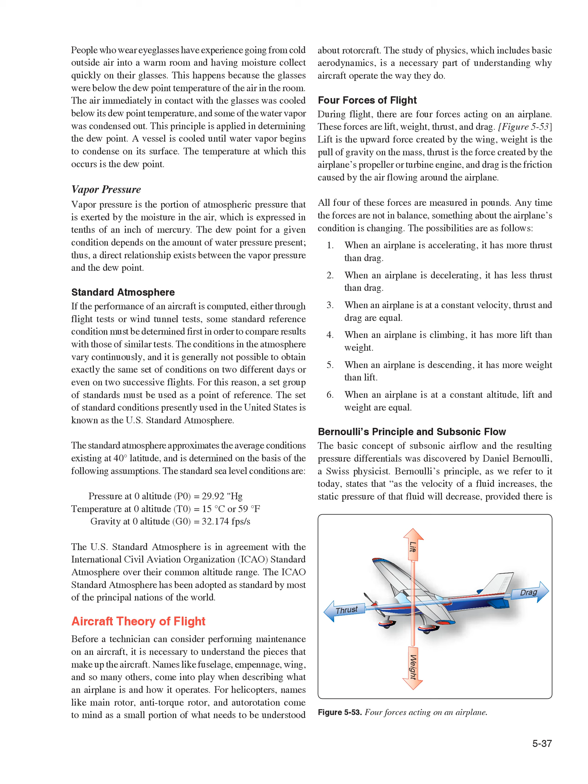Bernoulli's principle in subsonic flow. The basic concept of subsonic airflow, and the resulting pressure differentials, was discovered by Daniel Bernoulli, a Swiss physicist. Bernoulli's principle, as we refer to it today, states that as the velocity of a fluid increases, the static pressure of that fluid will decrease, provided there is no energy added or energy taken away.

A direct application of Bernoulli's principle is the study of air as it flows through either a converging or a diverging passage, and to relate the findings to some aviation concepts. A converging shape is one whose cross-sectional area gets progressively smaller from entry to exit. A diverging shape is just the opposite, with the cross-sectional area getting larger from entry to exit.

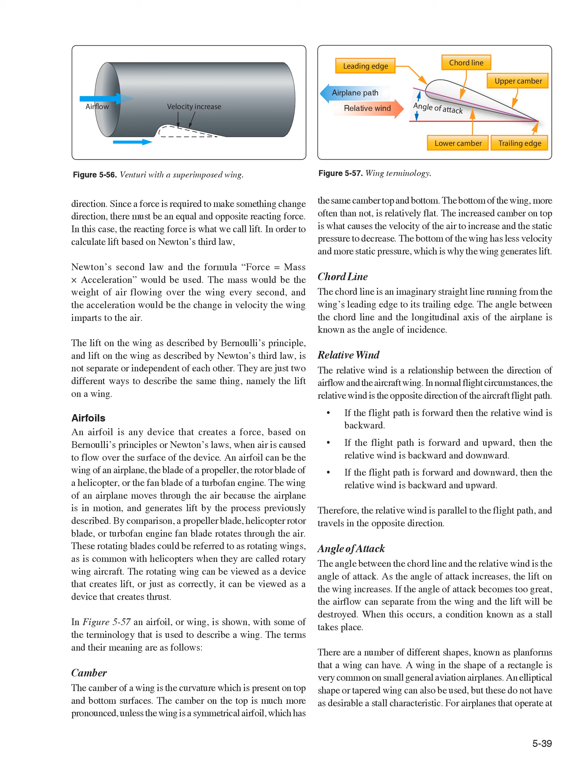There are a number of different shapes, known as planforms, that a wing can have. A wing in the shape of a rectangle is very common on small general aviation airplanes. An elliptical shape or tapered wing can also be used, but these do not have as desirable a stall characteristic. For airplanes that operate at high subsonic speeds, swept-back wings are common, and for supersonic flight, a delta shape might be used.

The aspect ratio of a wing is the relationship between its span, or a wingtip to wingtip measurement, and the chord of the wing. If a wing has a long span and a very narrow chord, it is said to have a high aspect ratio. A higher aspect ratio produces less drag for a given flight speed, and is typically found on glider-type aircraft.

The angle of incidence of a wing is the angle formed by the intersection of the wing chord line and the horizontal plane passing through the longitudinal axis of the aircraft. Many airplanes are designed with a greater angle of incidence at the root of the wing than at the tip, and this is referred to as washout. This feature causes the inboard part of the wing to stall before the outboard part, which helps maintain aileron control during the initial stages of a wing stall.

Boundary layer airflow. The boundary layer is a very thin layer of air lying over the surface of the wing and, for that matter, all other surfaces of the airplane. Because air has viscosity, this layer of air tends to adhere to the wing. As the wing moves forward through the air, the boundary layer at first flows smoothly over the streamlined shape of the airfoil. Here the flow is called the laminar layer.

As the boundary layer approaches the center of the wing, it begins to lose speed due to skin friction and it becomes thicker and turbulent. Here it is called the turbulent layer. The point at which the boundary layer changes from laminar to turbulent is called the transition point. Where the boundary layer becomes turbulent, drag due to skin friction is relatively high.

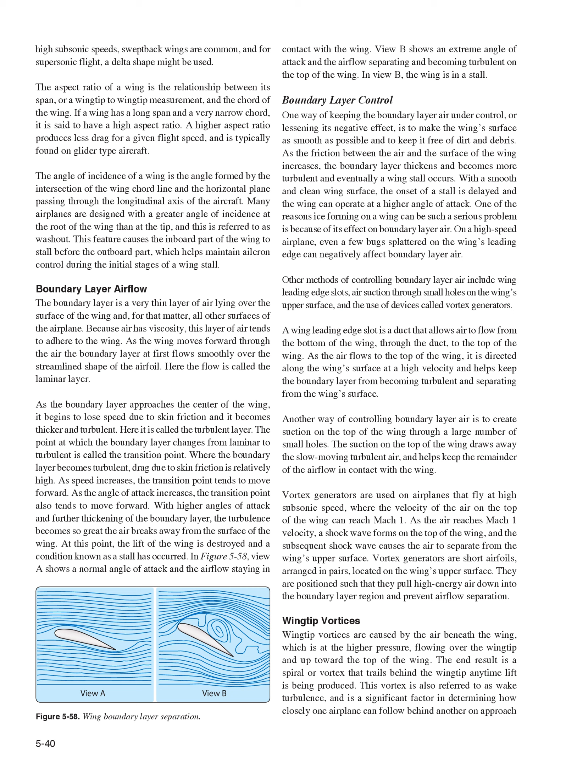The wake turbulence of a large airplane can cause a smaller airplane, if it is following too closely, to be thrown out of control. Vortices from the wing and from the horizontal stabilizer are quite visible on the MD-11 shown in Figure 5-59.

Upwash and downwash refer to the effect an airfoil has on the free airstream. Upwash is the deflection of the oncoming airstream, causing it to flow up and over the wing. Downwash is the downward deflection of the airstream after it has passed over the wing and is leaving the trailing edge. This downward deflection is what creates the action and reaction described under lift and Newton's third law.

Axes of an aircraft. An airplane in flight is controlled around one or more of three axes of rotation. These axes of rotation are the longitudinal, lateral, and vertical. On the airplane, all three axes intersect at the center of gravity. As the airplane pivots on one of these axes, it is in essence pivoting around the center of gravity, CG.

The center of gravity is also referred to as the center of rotation. On the brightly colored airplane shown in Figure 5-60, the three axes are shown in the colors red for the vertical axis, blue for the longitudinal axis, and orange for the lateral axis. The flight control that makes the airplane move around the axis is shown in a matching color.

The rudder, in red, causes the airplane to move around the vertical axis, and this movement is described as a yaw. The elevator, in orange, causes the airplane to move around the lateral axis, and this movement is described as a pitch. The ailerons, in blue, cause the airplane to move around the longitudinal axis, and this movement is described as a roll.

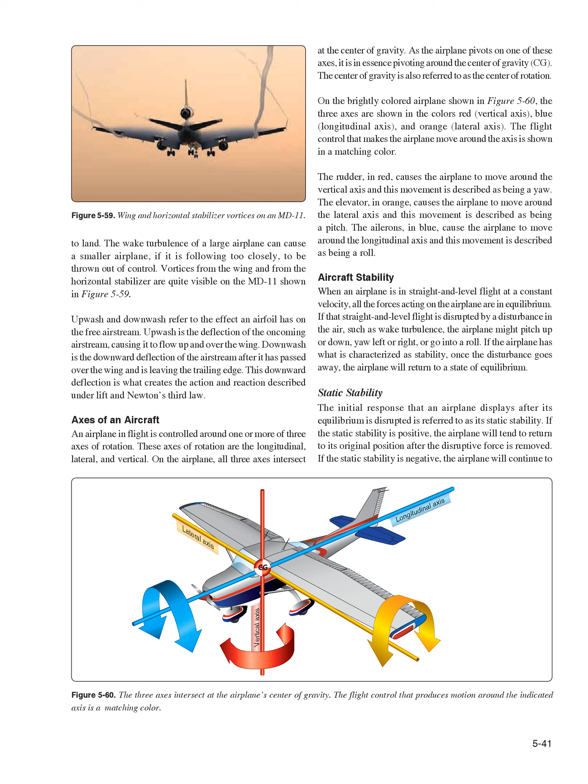The initial response that an airplane displays after its equilibrium is disrupted is referred to as its static stability. If the static stability is positive, the airplane will tend to return to its original position after the disruptive force is removed. If the static stability is negative, the airplane will continue to move away from its original position after the disruptive force is removed.

If an airplane with negative static stability has the nose pitch up because of wake turbulence, the tendency will be for the nose to continue to pitch up even after the turbulence goes away. If an airplane tends to remain in a displaced position after the force is removed, but does not continue to move toward even greater displacement, its static stability is described as being neutral.

Dynamic stability. The dynamic stability of an airplane involves the amount of time it takes for it to react to its static stability after it has been displaced from a condition of equilibrium. Dynamic stability involves the oscillations that typically occur as the airplane tries to return to its original position or attitude. Even though an airplane may have positive static stability, it may have dynamic stability which is positive, neutral, or negative.

Imagine that an airplane in straight and level flight is disturbed and pitches nose up. If the airplane has positive static stability, the nose will pitch back down after the disturbance is removed. If it immediately returns to straight and level flight, it is also said to have positive dynamic stability. The airplane, however, may pass through level flight and remain pitched down, and then continue the recovery process by pitching back up. This pitching up and then down is known as an oscillation.

If the oscillations lessen over time, the airplane is still classified as having positive dynamic stability. If the oscillations increase over time, the airplane is classified as having negative dynamic stability. If the oscillations remain the same over time, the airplane is classified as having neutral dynamic stability.

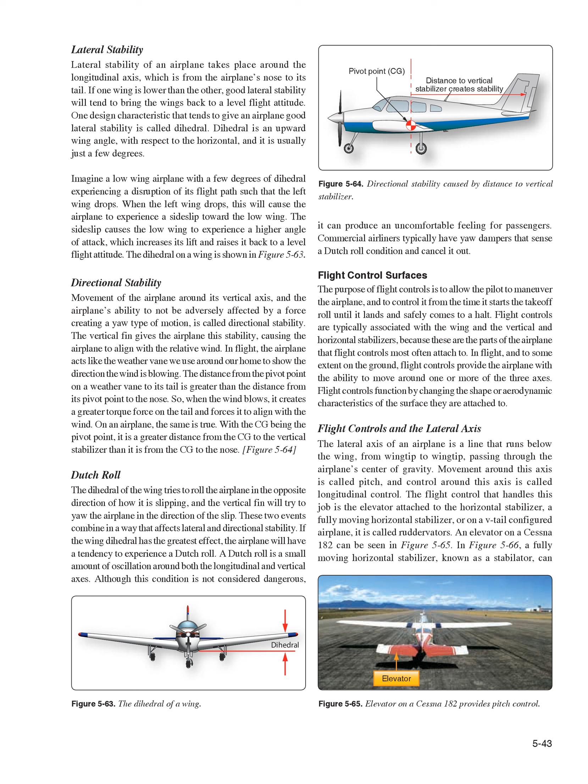The flight control that handles this job is the elevator attached to the horizontal stabilizer, a fully moving horizontal stabilizer, or on a V-tail configured airplane, it is called ruddervators. An elevator on a Cessna 182 can be seen in Figure 5-65. In Figure 5-66, a fully moving horizontal stabilizer, known as a stabilator, provides pitch control and can be seen on a Piper Cherokee Cruiser PA-28-140, and Figure 567 shows a ruddervator on a Beechcraft Bonanza.

Depending on the airplane being discussed, movement around the lateral axis happens as a result of the pilot moving the control wheel or yoke, the control stick, or on some airplanes a side stick. On the airplanes shown in Figures 5-70 and 5-71, a control wheel or yoke is used.

On the Cessna 182 shown in Figure 565, pulling back on the control wheel causes the trailing edge of the elevator to deflect upward, causing an increased downward force that raises the nose of the airplane. Movement of the elevator causes the nose of the airplane to pitch up or pitch down by rotating around the lateral axis. The Cessna 182 control wheel can be seen in Figure 568.

On the Piper Cherokee Cruiser PA-28-140 shown in Figure 566, pulling back on the control wheel causes the entire horizontal surface, or stabilator, to move, with the trailing edge deflecting upward. The anti-servo tab seen on the Cherokee provides a control feel similar to what would be experienced by moving an elevator. Without this tab, the stabilator might be too easy to move and a pilot could over-control the airplane.

The ruddervators shown on the Beechcraft Bonanza in Figure 567 are also moved by the control wheel, with their trailing edges deflecting upward when the control wheel is pulled back. As the name implies, these surfaces also act as the rudder for this airplane.

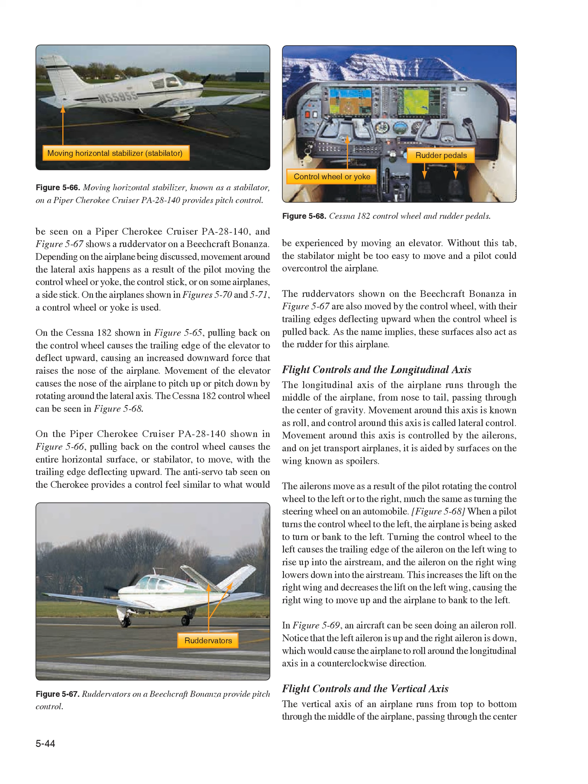Flight controls in the vertical axis. The vertical axis of an airplane runs from top to bottom through the middle of the airplane, passing through the center of gravity. Movement around this axis is known as yaw, and control around this axis is called directional control.

Movement around this axis is controlled by the rudder, or in the case of the Beechcraft Bonanza in Figure 567, by the ruddervators. The feet of the pilot are on the rudder pedals, and pushing on the left or right rudder pedal makes the rudder move left or right. The trailing edge of the rudder moves to the right, and the nose of the airplane yaws to the right, when the right rudder pedal is pushed. The rudder pedals of a Cessna 182 can be seen in Figure 568.

Even though the rudder of the airplane will make the nose yaw to the left or the right, the rudder is not what turns the airplane. For what is called a coordinated turn to occur, both the ailerons and rudder come into play. Let's say we want to turn the airplane to the right. We start by turning the control wheel to the right, which raises the right aileron and lowers the left aileron and initiates the banking turn.

The increased lift on the left wing also increases the induced drag on the left wing, which tries to make the nose of the airplane yaw to the left. To counteract this, when the control wheel is moved to the right, a small amount of right rudder is used to keep the nose of the airplane from yawing to the left. Once the nose of the airplane is pointing in the right direction, pressure on the rudder is no longer needed. The rudder of a Piper Cherokee Arrow can be seen in Figure 570.

Trim tabs are small movable surfaces that attach to the trailing edge of flight controls. These tabs can be controlled from the flight deck, and their purpose is to create an aerodynamic force that keeps the flight control in a deflected position.

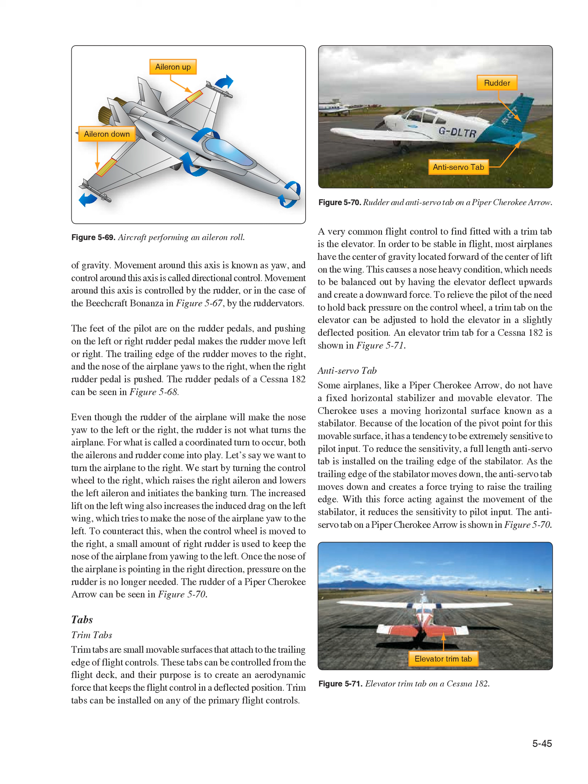To reduce the sensitivity, a full-length anti-servo tab is installed on the trailing edge of the stabilator. As the trailing edge of the stabilator moves down, the anti-servo tab moves down and creates a force trying to raise the trailing edge. With this force acting against the movement of the stabilator, it reduces the sensitivity to pilot input. The anti-servo tab on a Piper Cherokee Arrow is shown in Figure 570.

Balance tab. On some airplanes, the force needed to move the flight controls can be excessive. In these cases, a balance tab can be used to generate a force that assists in the movement of the flight control. Just the opposite of anti-servo tabs, balance tabs move in the opposite direction of the flight control's trailing edge, providing a force that helps the flight control move.

Servo tab. On large airplanes, because the force needed to move the flight controls is beyond the capability of the pilot, hydraulic actuators are used to provide the necessary force. In the event of a hydraulic system malfunction or failure, some of these airplanes have servo tabs on the trailing edge of the primary flight controls.

When the control wheel is pulled back in an attempt to move the elevator, the servo tab moves and creates enough aerodynamic force to move the elevator. The servo tab is acting like a balance tab, but rather than assisting the normal force that moves the elevator, it becomes the sole force that makes the elevator move. Like the balance tab, the servo tab moves in the opposite direction of the flight control's trailing edge.

The Boeing 727 has servo tabs that back up the hydraulic system in the event of a failure. During normal flight, the servo tabs act like balance tabs.

Figure 572, supplemental lift modifying devices. If the wing of an airplane was designed to produce the maximum lift possible at low airspeed, to accommodate takeoffs and landings, it would not be suited for higher speed flight because of the enormous amount of drag it would produce. To give the wing the ability to produce maximum low speed lift without being drag prohibitive, retractable high lift devices, such as flaps and slats, are utilized.

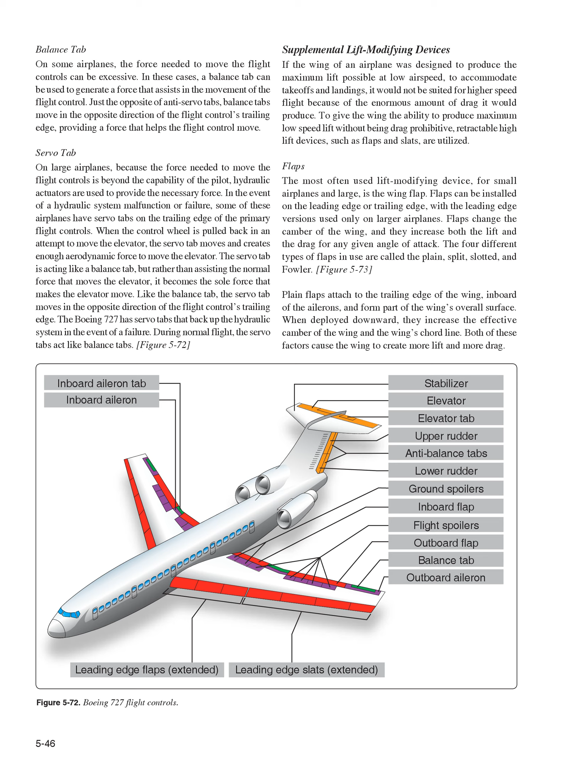The split flap attaches to the bottom of the wing, and deploys downward without changing the top surface of the wing. This type of flap creates more drag than the plain flap because of the increase in turbulence. The slotted flap is similar to the plain flap, except when it deploys, the leading edge drops down a small amount.

By having the leading edge drop down slightly, a slot opens, which lets some of the high-pressure air on the bottom of the wing flow over the top of the flap. This additional airflow over the top of the flap produces additional lift.

The Fowler flap attaches to the back of the wing using a track and roller system. When it deploys, it moves aft in addition to deflecting downward. This increases the total wing area, in addition to increasing the wing camber and chord line. This type of flap is the most effective of the four types, and it is the type used on commercial airliners and business jets.

Leading edge slots. Leading edge slots are ducts or passages in the leading edge of a wing that allow high pressure air from the bottom of the wing to flow to the top of the wing. This ducted air flows over the top of the wing at a high velocity and helps keep the boundary layer air from becoming turbulent and separating from the wing. Slots are often placed on the part of the wing ahead of the ailerons, so during a wing stall, the inboard part of the wing stalls first and the ailerons remain effective.

Leading edge slats. Leading edge slats serve the same purpose as slots, the difference being that slats are movable and can be retracted when not needed. On some airplanes, leading edge slats have been automatic in operation, deploying in response to the aerodynamic forces that come into play during a high angle of attack. On most of today's commercial airliners, the leading edge slats deploy when the trailing edge flaps are lowered.

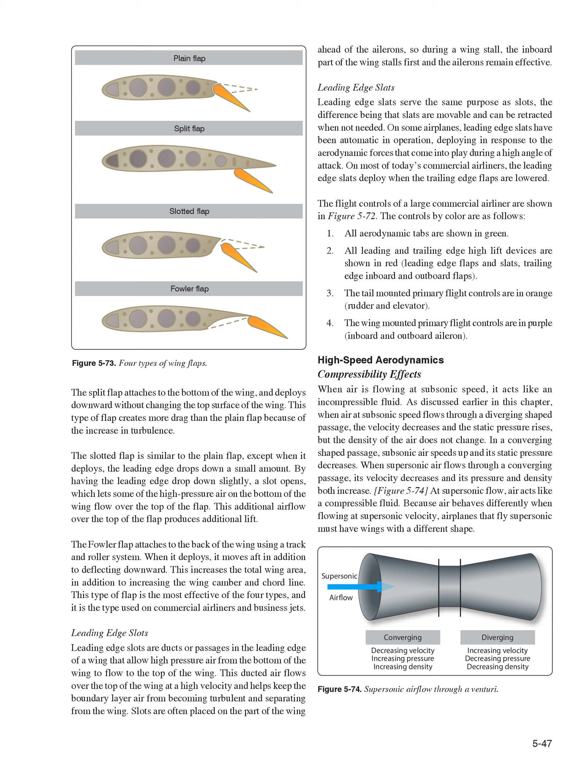High-speed aerodynamics, compressibility effects: when air is flowing at subsonic speed, it acts like an incompressible fluid. As discussed earlier in this chapter, when air at subsonic speed flows through a diverging shaped passage, the velocity decreases and the static pressure rises, but the density of the air does not change. In a converging shaped passage, subsonic air speeds up and its static pressure decreases. When supersonic air flows through a converging passage, its velocity decreases and its pressure and density both increase. Figure 574: at supersonic flow, air acts like a compressible fluid. Because air behaves differently when flowing at supersonic velocity, airplanes that fly supersonic must have wings with a different shape.

The speed of sound, in reference to airplanes and their movement through the air, is nothing more than pressure disturbances in the air. As discussed earlier in this chapter, it is like dropping a rock in the water and watching the waves flow out from the center. As an airplane flies through the air, every point on the airplane that causes a disturbance creates sound energy in the form of pressure waves. These pressure waves flow away from the airplane at the speed of sound, which at standard day temperature of 59 degrees Fahrenheit, is 761 miles per hour. The speed of sound in air changes with temperature, increasing as temperature increases. Figure 575 shows how the speed of sound changes with altitude.

Subsonic, transonic, and supersonic flight: when an airplane is flying at subsonic speed, all of the air flowing around the airplane is at a velocity of less than the speed of sound, which is known as Mach 1. Keep in mind that the air accelerates when it flows over certain parts of the airplane, like the top of the wing, so an airplane flying at 500 miles per hour could have air over the top of the wing reach a speed of 600 miles per hour. How fast an airplane can fly and still be considered in subsonic flight varies with the design of the wing, but as a Mach number, it will typically be just over Mach 0.8.

When an airplane is flying at transonic speed, part of the airplane is experiencing subsonic airflow and part is experiencing supersonic airflow. Over the top of the wing, probably about halfway back, the velocity of the air will reach Mach 1 and a shock wave will form. The shock wave forms 90 degrees to the airflow and is known as a normal shock wave. Stability problems can be encountered during transonic flight, because the shock wave can cause the airflow to separate from the wing.

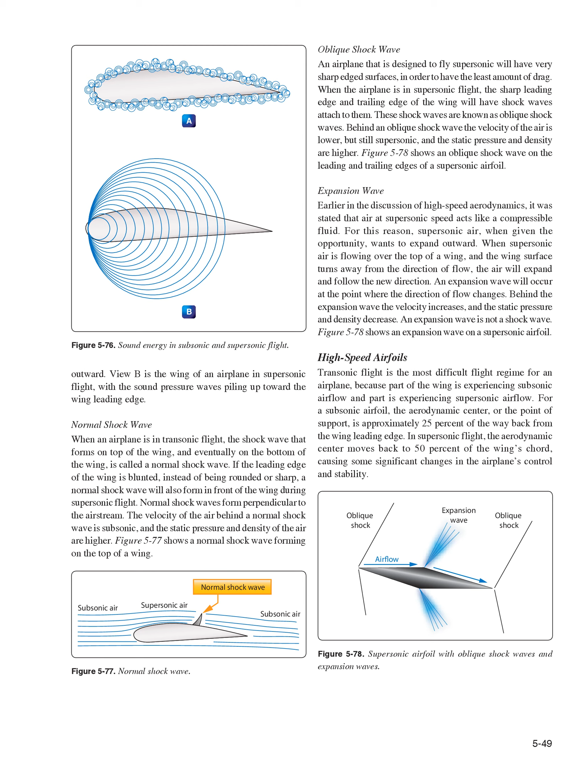If an airplane designed to fly subsonic, perhaps at a Mach number of 0.80, flies too fast and enters transonic flight, some noticeable changes will take place with respect to the airflow over the wing. Figure 579 shows 6 views of a wing, with each view showing the Mach number getting higher. The scenario for the 6 views is as follows: A. The Mach number is fairly low, and the entire wing is experiencing subsonic airflow. B. The velocity has reached the critical Mach number, where the airflow over the top of the wing is reaching Mach 1 velocity. C. The velocity has surpassed the critical Mach number, and a normal shock wave has formed on the top of the wing.

Some airflow separation starts to occur behind the shock wave. D. The velocity has continued to increase beyond the critical Mach number, and the normal shock wave has moved far enough aft that serious airflow separation is occurring. A normal shock wave is now forming on the bottom of the wing as well. Behind the normal shock waves, the velocity of the air is subsonic and the static pressure has increased.

E. The velocity has increased to the point that both shock waves on the wing, top and bottom, have moved to the back of the wing and attached to the trailing edge. Some airflow separation is still occurring. F. The forward velocity of the airfoil is greater than Mach 1, and a new shock wave has formed just forward of the leading edge of the wing. If the wing has a sharp leading edge, the shock wave will attach itself to the sharp edge.

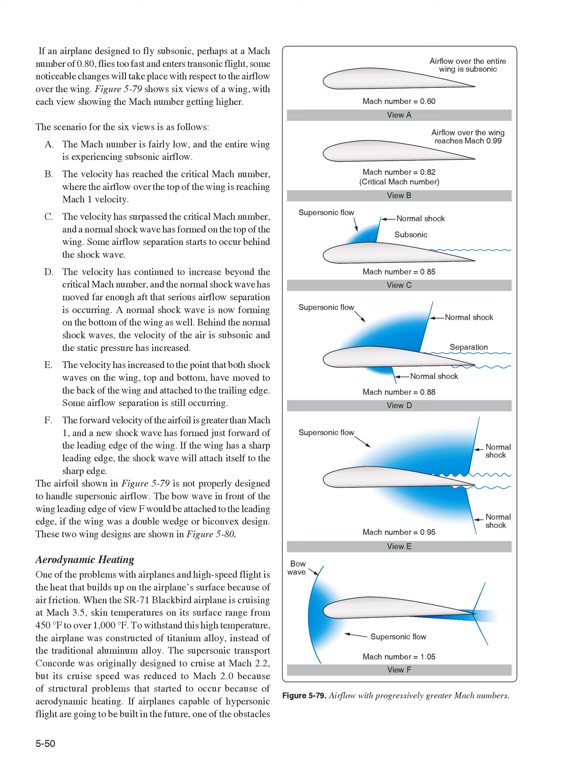The supersonic transport Concorde was originally designed to cruise at Mach 2.2, but its cruise speed was reduced to Mach 2.0 because of structural problems that started to occur because of aerodynamic heating. If airplanes capable of hypersonic flight are going to be built in the future, one of the obstacles that will have to be overcome is the stress on the airplane's structure caused by heat.

Helicopter aerodynamics. The helicopter, as we know it today, falls under the classification known as rotorcraft. Rotorcraft is also known as rotary wing aircraft, because instead of their wing being fixed like it is on an airplane, the wing rotates. The rotating wing of a rotorcraft can be thought of as a lift-producing device, like the wing of an airplane, or as a thrust-producing device, like the propeller on a piston engine.

Helicopter structures and airfoils. The main parts that make up a helicopter are the cabin, landing gear, tail boom, power plant, transmission, main rotor, and tail rotor. Figure 5-81. Main rotor systems. In the fully articulated rotor system, the blades are attached to the hub multiple times. The blades are hinged in a way that allows them to move up and down and fore and aft, and bearings provide for motion around the pitch change axis. Rotor systems using this type of arrangement typically have 3 or more blades.

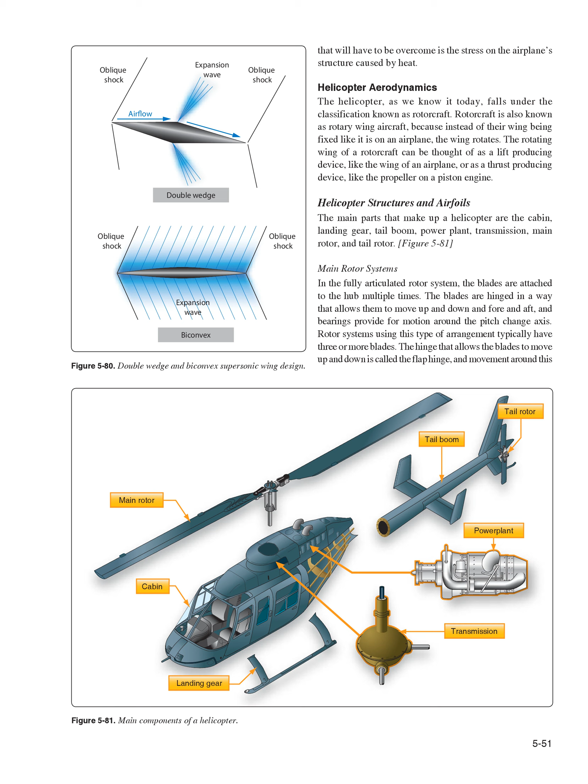With a rigid rotor system, the blades are not hinged for movement up and down, or flapping, or for movement fore and aft, or drag. The blades are able to move around the pitch change axis, with each blade being able to independently change its blade angle. The rigid rotor system uses blades that are very strong and yet flexible. They are flexible enough to bend when they need to without the use of hinges or a teetering rotor, to compensate for the uneven lift that occurs in forward flight. The Eurocopter Model 135 uses a rigid rotor system. Figure 5-85. Anti-torque systems.

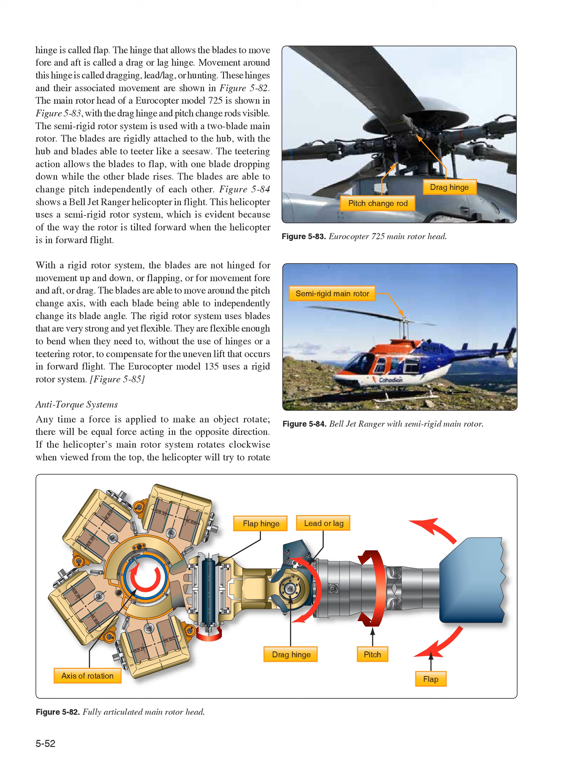Anytime a force is applied to make an object rotate, there will be equal force acting in the opposite direction. If the helicopter's main rotor system rotates clockwise when viewed from the top, the helicopter will try to rotate counterclockwise. Earlier in this chapter, it was discovered that torque is what tries to make something rotate. For this reason, a helicopter uses what is called an anti-torque system to counteract the force trying to make it rotate.

One method that is used on a helicopter to counteract torque is to place a spinning set of blades at the end of the tail boom. These blades are called a tail rotor or anti-torque rotor, and their purpose is to create a force, or thrust, that acts in the opposite direction of the way the helicopter is trying to rotate. The tail rotor force, in pounds, multiplied by the distance from the tail rotor to the main rotor, in feet, creates a torque in pound-feet that counteracts the main rotor torque.

Figure 5-86 shows a 3-bladed tail rotor on an Aerospatiale AS-315B helicopter. This tail rotor has open-tipped blades that are variable pitch, and the helicopter's anti-torque pedals, positioned like rudder pedals on an airplane, control the amount of thrust they create. Some potential problems with this tail rotor system are as follows. The spinning blades are deadly if someone walks into them. When the helicopter is in forward flight and a vertical fin may be in use to counteract torque, the tail rotor robs engine power and creates drag.

An alternative to the tail rotor seen in Figure 5-86 is a type of anti-torque rotor known as a fenestron, or fan-in-tail design, as seen in Figure 5-87. The rotating blades present less of a hazard to personnel on the ground, and they create less drag in flight, because they are enclosed in a shroud.

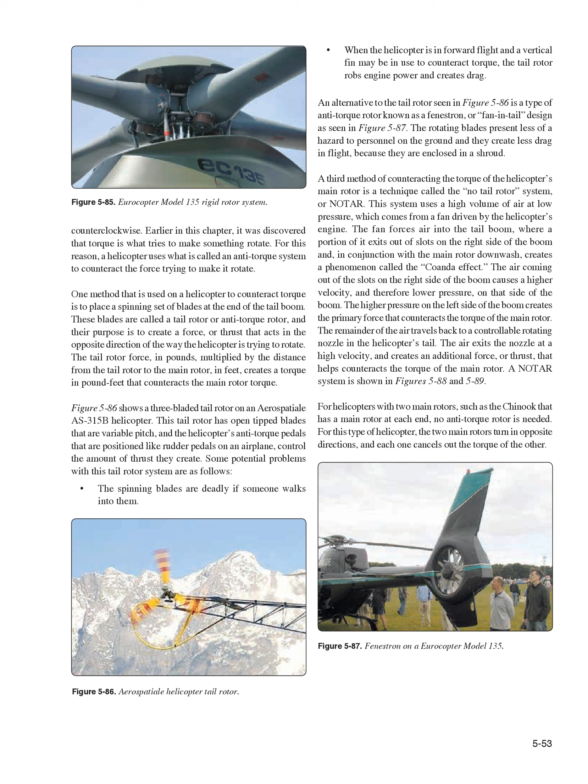For helicopters with two main rotors, such as the Chinook that has a main rotor at each end, no anti-torque rotor is needed. For this type of helicopter, the two main rotors turn in opposite directions, and each one cancels out the torque of the other.

Helicopter axes of flight. Helicopters, like airplanes, have a vertical, lateral, and longitudinal axis that passes through the helicopter's center of gravity. Helicopters yaw around the vertical axis, pitch around the lateral axis, and roll around the longitudinal axis. Figure 5-90 shows the three axes of a helicopter and how they relate to the helicopter's movement. All three axes will intersect at the helicopter's center of gravity, and the helicopter pivots around this point. Notice in the figure that the vertical axis passes almost through the center of the main rotor, because the helicopter's center of gravity needs to be very close to this point.

Control around the vertical axis for a single main rotor helicopter. Control around the vertical axis is handled by the anti-torque rotor, or tail rotor, or from the fan's airflow on a NOTAR-type helicopter. Like in an airplane, rotation around this axis is known as yaw. The pilot controls yaw by pushing on the anti-torque pedals located on the cockpit floor, in the same way the airplane pilot controls yaw by pushing on the rudder pedals.

To make the nose of the helicopter yaw to the right, the pilot pushes on the right anti-torque pedal. When viewed from the top, if the helicopter tries to spin in a counterclockwise direction because of the torque of the main rotor, the pilot will also push on the right anti-torque pedal to counteract the main rotor torque. By using the anti-torque pedals, the pilot can intentionally make the helicopter rotate in either direction around the vertical axis.

The anti-torque pedals can be seen in Figure 5-91. Some helicopters have a vertical stabilizer, such as those shown in Figures 5-90 and 5-92. In forward flight, the vertical stabilizer creates a force that helps counteract the torque of the main rotor, thereby reducing the power needed to drive the anti-torque system located at the end of the tail boom.

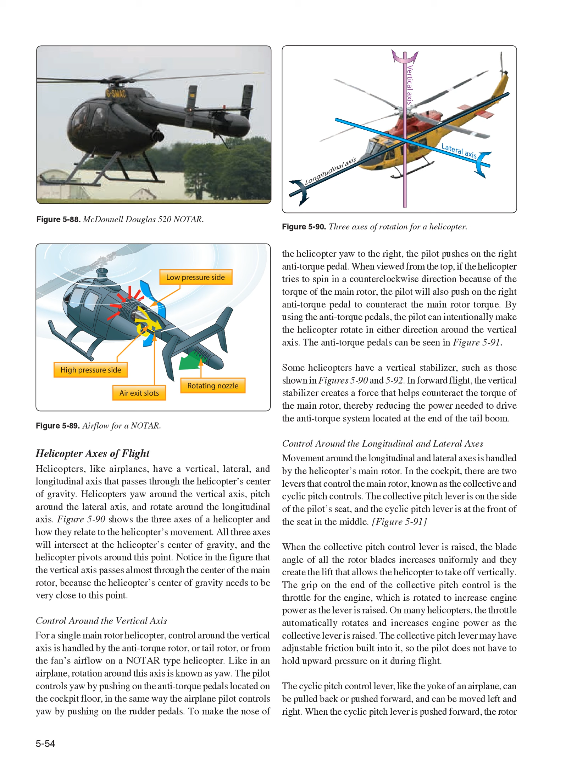The cyclic pitch control lever, like the yoke of an airplane, can be pulled back or pushed forward, and can be moved left and right. When the cyclic pitch lever is pushed forward, the rotor blades create more lift as they pass through the back half of their rotation and less lift as they pass through the front half. The difference in lift is caused by changing the blade angle, or pitch, of the rotor blades. The pitch change rods that were seen earlier, in Figures 5-82 and 5-83, are controlled by the cyclic pitch lever and they are what change the pitch of the rotor blades.

The increased lift in the back either causes the main rotor to tilt forward, the nose of the helicopter to tilt downward, or both. The end result is the helicopter moves in the forward direction. If the cyclic pitch lever is pulled back, the rotor blade lift will be greater in the front and the helicopter will back up. If the cyclic pitch lever is moved to the left or the right, the helicopter will bank left or bank right. For the helicopter to bank to the right, the main rotor blades must create more lift as they pass by the left side of the helicopter. Just the opposite is true if the helicopter is banking to the left.

By creating more lift in the back than in the front, and more lift on the left than on the right, the helicopter can be in forward flight and banking to the right. In Figure 5-92, an Agusta A109 can be seen in forward flight and banking to the right. The rotor blade in the rear and the one on the left are both in an upward raised position, meaning they have both experienced the condition called flap. Some helicopters use a horizontal stabilizer, similar to what is seen on an airplane, to help provide additional stability around the lateral axis. A horizontal stabilizer can be seen on the Agusta A109 in Figure 5-92.

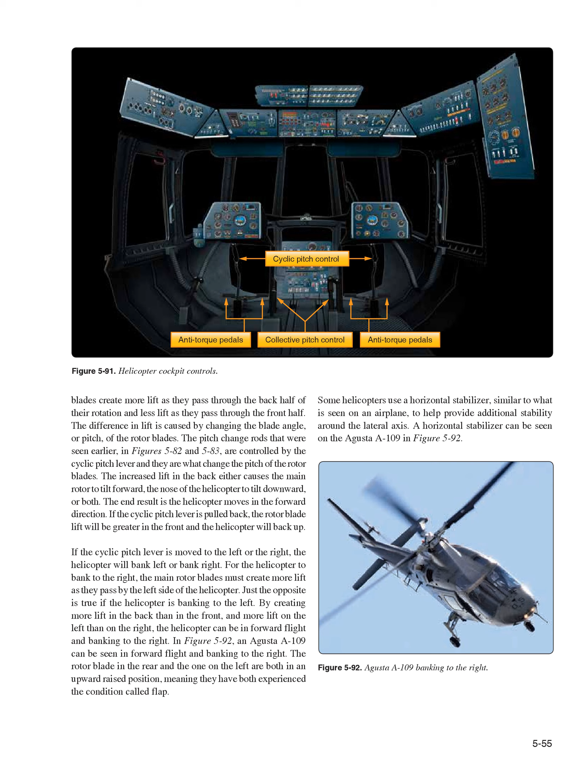Helicopters in flight. Hovering. For a helicopter, hovering means that it is in flight at a constant altitude, with no forward, aft, or sideways movement. In order to hover, a helicopter must be producing enough lift in its main rotor blades to equal the weight of the aircraft. The engine of the helicopter must be producing enough power to drive the main rotor, and also to drive whatever type of anti-torque system is being used. The ability of a helicopter to hover is affected by many things, including whether or not it is in ground effect, the density altitude of the air, the available power from the engine, and how heavily loaded it is.

For a helicopter to experience ground effect, it typically needs to be no higher off the ground than 1/2 of its main rotor system diameter. If a helicopter has a main rotor diameter of 40 feet, it will be in ground effect up to an altitude of approximately 20 feet. Being close to the ground affects the velocity of the air through the rotor blades, causing the effective angle of attack of the blades to increase and the lift to increase.

If a helicopter is in ground effect, it can hover at a higher gross weight than it can when out of ground effect. On a windy day, the positive influence of ground effect is lessened, and at a forward speed of 5 to 10 miles per hour the positive influence becomes less. In Figure 5-93, an Air Force CH-53 is seen in a hover, with all the rotor blades flapping up as a result of creating equal lift.

Forward flight: In the early days of helicopter development, the ability to hover was mastered before there was success in attaining forward flight. The early attempts at forward flight resulted in the helicopter rolling over when it tried to depart from the hover and move in any direction.

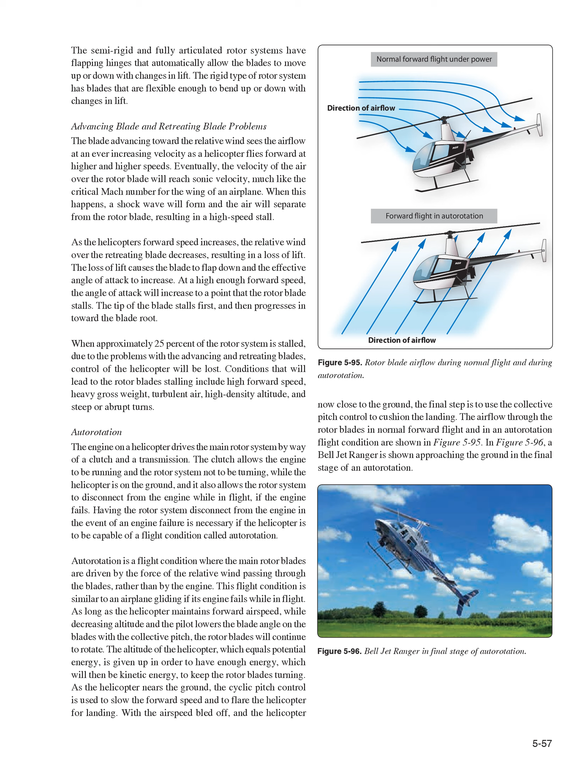Weight shift control, flexible wing aircraft aerodynamics. A weight shift control, flexible wing type aircraft consists of a fabric-covered wing, often referred to as the sail, attached to a tubular structure that has wheels, seats, and an engine and propeller. The wing structure is also tubular, with the fabric covering creating the airfoil shape.

The shape of the wing varies among the different models of weight shift control aircraft being produced, but a delta-shaped wing is a very popular design. Within the weight shift control aircraft community, these aircraft are typically referred to as trikes. In Figure 5-97, the trike's mast is attached to the wing at the hang point on the keel of the wing with a hang point bolt and safety cable.

There is also a support tube, known as a king post, extending up from the top of the wing, with cables running down and secured to the tubular wing structure. The cables running down from the king post as part of the upper rigging are there to support the wing when the aircraft is on the ground, and to handle negative loads when in flight.

The lines that run from the king post to the trailing edge of the wing are known as reflex cables. These cables maintain the shape of the wing when it is in a stalled state by holding the trailing edge of the wing up, which helps raise the nose during recovery from the stall. If the aircraft goes into an inadvertent stall, having the trailing edge of the wing in a slightly raised position helps raise the nose of the aircraft and get it out of the dive.

The passenger seat is centered under the wing's aerodynamic center, with the weight of the pilot being forward of this point and the weight of the engine and propeller being aft. Unlike a traditional airplane, the trike does not have a rudder, elevator, or ailerons. Instead, it has a wing that can be pivoted forward or aft, and left or right.

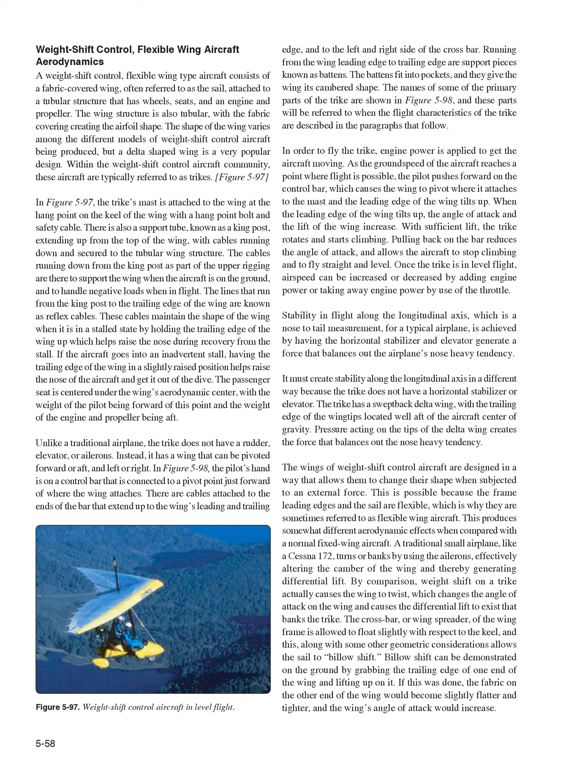If the pilot pushes the bar to the right, the wing pivots with the left wingtip dropping down and the right wingtip rising up, causing the aircraft to bank to the left. This motion is depicted in Figure 5-99, showing a hang glider as an example.

The shift in weight to the left increases the wing loading on the left and lessens it on the right. The increased loading on the left wing increases its washout and reduces its angle of attack and lift. This increased load causes the left wing to billow, which tightens the fabric on the right wing, increasing its angle of attack and lift. The change in lift is what banks the aircraft to the left. Billow on the left wing is depicted in Figure 5-100.

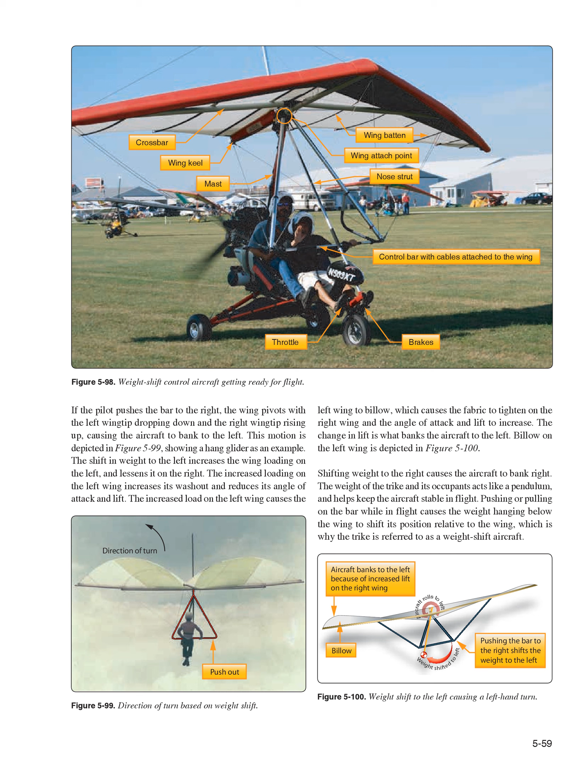Shifting weight to the right causes the aircraft to bank right. The weight of the trike and its occupants acts like a pendulum, helping keep the aircraft stable in flight. Pushing or pulling on the bar while in flight causes the weight hanging below the wing to shift position relative to the wing, which is why the trike is called a weight shift aircraft.

Once the trike is flying straight and level, the pilot only needs to keep light pressure on the bar that controls the wing. If the trike is properly balanced and there is no air turbulence, the aircraft will remain stable even if the pilot's hands are removed from the bar.

The same as with any airplane, increasing engine power will make the aircraft climb and decreasing power will make it descend. The throttle is typically controlled with a foot pedal, like a gas pedal in an automobile.

A trike lands in a manner very similar to an airplane. When it is time to land, the pilot reduces engine power with the foot-operated throttle, causing airspeed and wing lift to decrease. As the trike descends, the rate of descent can be controlled by pushing forward or pulling back on the bar and varying engine power. When the trike is almost to the point of touchdown, engine power is reduced and the angle of attack of the wing is increased, to cushion the descent and provide a smooth landing.

Powered parachute aerodynamics. A powered parachute has a carriage very similar to the weight shift control aircraft. Its wing, however, has no support structure or rigidity and only takes on the shape of an airfoil when it is inflated by the blast of air from the propeller and the forward speed of the aircraft.